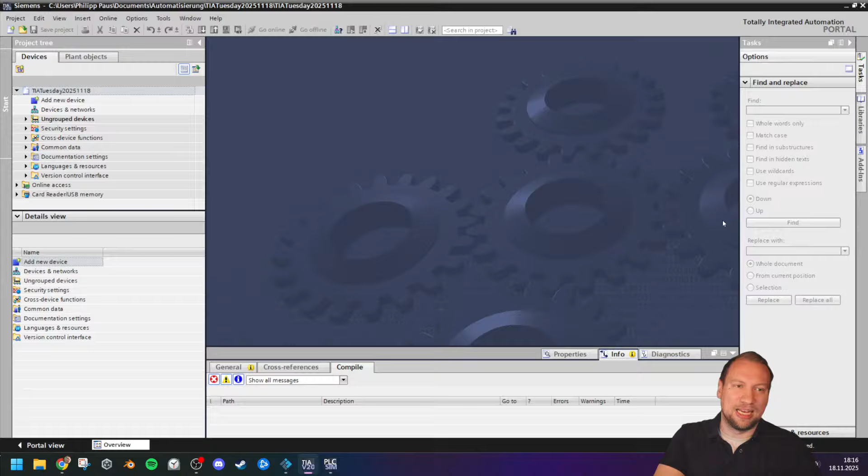An old IHK-Prüfung. Oh goodness, I have not done IHK-Prüfungen in a long time. Of course, I've been involved with quite a bit, but I'll put that here. IHK-Prüfung. Oh, that would be interesting. There's probably a lot of public questions. IHK, for everyone that doesn't know it, is the Industrie- und Handelskammer, which is the German agency that observes all of the rules in industry and so on here in Germany. And there are probably a lot of public questions that we could go into. Explain MRP. MRP is also interesting. I'll put that on. But then I can only put things on a list.

I will now do the... Oh, did I close my document? Damn it. Where did my folder go? There. Let's start with the PID though. We don't have infinite time, unfortunately. But I will also put MRP domain on the communication list there. Communication seems to be a very interesting topic for a lot of people, I've realized. Okay, let's go. I'll put this on the second screen here. So what I have prepared is absolutely nothing. Okay, yeah, I share my knowledge. Of course, if I can share it, why not? So here is the plan.

We do have this tank system here. Now this tank system can be controlled with a fill valve. So I can turn on and off the fill valve here, and there is water or whatever liquid leaking into the system through a valve system. And the nice thing about the software is it even has a fluid simulation going on. And a very common task in industry, and all around us, not just industry, everyday life, you driving a car, for example, is to keep something constant or to go to a set point value.

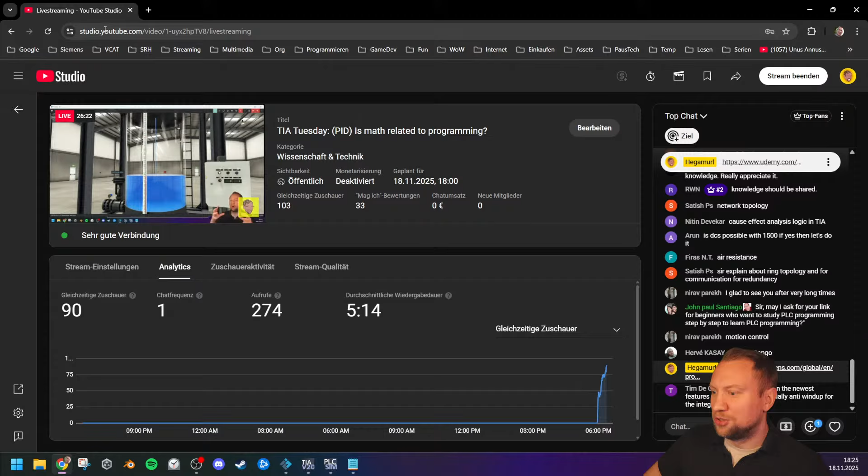So there we go. From Congo. That's at least same time zone-ish. Newest features, I will get into the PID features, I hope, in a minute there, Tim. Sorry, you shouldn't see my analytics going on there.

Okay, so yeah, there is a lot of complexity in this, and I hope I can hurry up now a little bit because I am now very slow. So what I want to do is develop a controller here step by step, where I can also have the set point here. I have a knob. This is my set point.

This set point, if it is at 0, if I turn it all the way to the left, the tank should be empty. If I turn it to the right, the tank should be completely full. If I turn it to the center, the tank should be half full. Obviously, this is an obvious thing, I would say. All the rest I will not be using, but I will use the set point here, which is right now at 5.0, so the tank is 3 meters, so it should go up to 150.

And there's many things we have to consider here. So now we really start with our content here. What I did in preparation, but closed again, is this. I will be using TIA Portal, and of course I will simulate my PLC here. The set point is our input in this case, yes. Or one input. We have 2 inputs. I'll get to that in a moment.

I want to communicate here with Factory I/O, so if you have the same setup, you will have to have a PLCSIM Advanced license, and then we have to change to TCP/IP single adapter. There is another way in Factory I/O, but that's what I want to use right now. And then I want to add an S7-1500 PLC. This S7-1500 PLC has to have specific settings. The first setting, it has to have a specific name, which is Factory I/O. And the second thing is it needs an advanced license here.

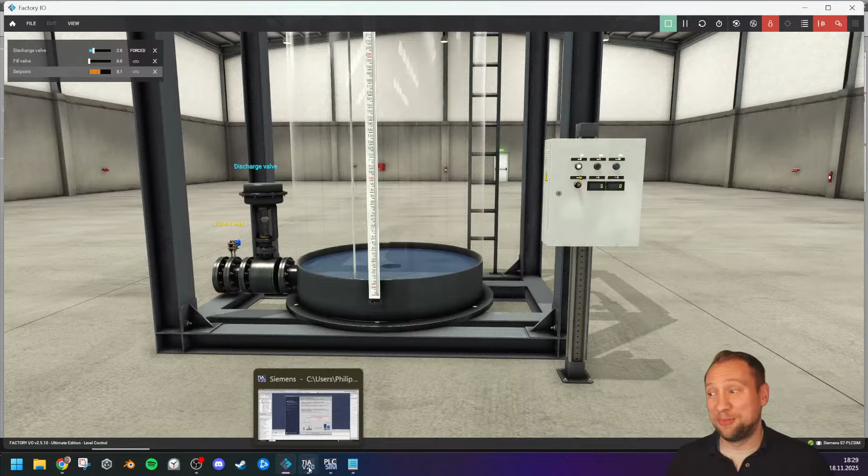If that wouldn't have worked, I would have had to restart my PC, and that would have been very annoying. So when we have a new PLC, I will deactivate all of the safety features here, right? I don't want to protect my project. It's not necessary. It's for me right now, so I will just deactivate this.

This here doesn't really matter what we do. It's for HMI systems mostly, so no password protection. Everything has full access. There we go. So no new settings, like with the firmware version 4.0, that pop-up that I just flashed through would have been a little bit more annoying.

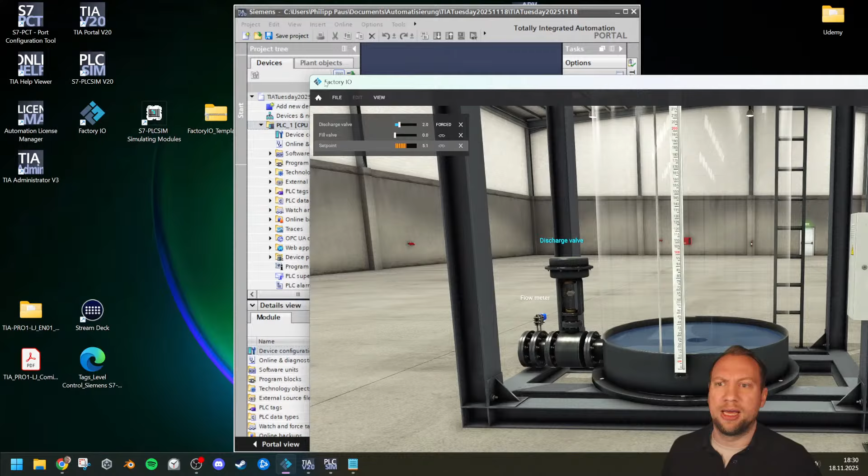Okay, so let's go. Now, the one other thing that I have already done is I have exported. There is an export button for my tags, so the I/O tags here I can export. I could also import it manually. Right now it's not too much, but since I have them, I have exported them. They are here on my desktop, and I can import this tag list into my tags here.

So I will go on my all tags, and there is an import button. I will press the import button. I will select the file, so you don't need to see my desktop here though. I mean, there's nothing on it, but still. There we go.

I get you, Satish. Ring communication for redundancy. I understand. You had that earlier, but I can't set up any ring network right now. I don't have a simulation for my networking here.

There we go. So that's it, right? This is the base setting here. That should be fine. There we go. Why was it so big? Oh God, yeah, I know why. This is gonna annoy me a little bit.

So now I want to connect, and I do not use the PLCSIM internal connection. I do use the virtual Ethernet adapter, which is able to communicate to Factory I/O. I also need to select all compatible devices because the PLC that we want to connect to does not have an IP address yet. This IP address 0.0.0.0, it's like if you buy a PLC. Trial license, 7 days left, I know. If you buy a PLC, it doesn't have an IP address.

Oh, right. Actually, very quickly, while I'm at it, when you download a program... I do have a document for this. When you buy a PLC, how can you communicate with it if it does not have an IP address? There are many different ways to communicate. If you want to download a program to a PLC, you want to use TCP/IP. That's a layer, like the communication layer. I don't have the layer names, but we will use a very high layer.

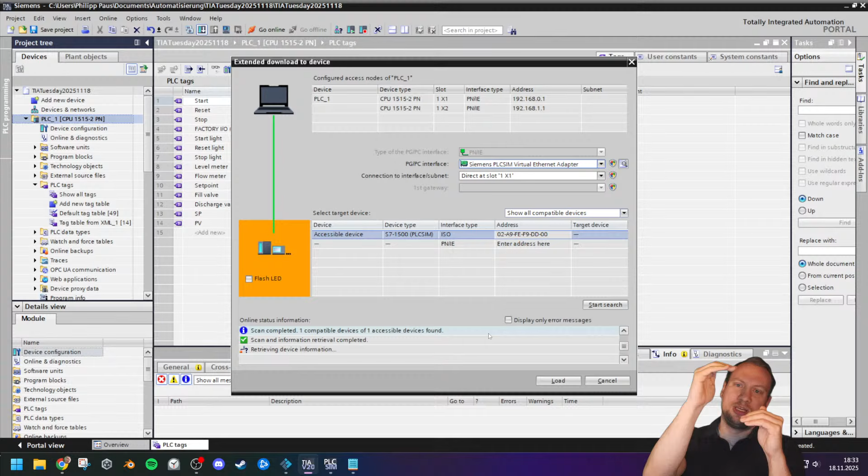Now the problem is we don't have an IP address. We cannot use this layer. So what happens first is we are using the ISO layer, or the ISO principle here, to first give an IP address to the PLC. So there's actually two steps when you download to the PLC. The first step is using the ISO layer to give it an IP address. And the second is download the program using that IP address.

So you can always find a PLC, because finding a PLC happens on the ISO layer, but you cannot always access a PLC because the higher level access happens through TCP, through the... How's the layer called in the ISO OSI model? Sorry, I have that incorrect. Through the transport layer there. TCP, yeah, transport, of course. Not too important though, but your PLC has two ways of communicating.

And right now, what happens if I click load is that the PLC is getting an IP address first. So this is the first thing that's going to change. Oh, I can explain software events along the way, sure. So the first thing that's going to happen is it will get an IP address. And you see this? That's the first thing that literally happened. And now my PC wants to communicate using that IP address. Now, my PC is not in this network. My PC is in a completely different network right now.

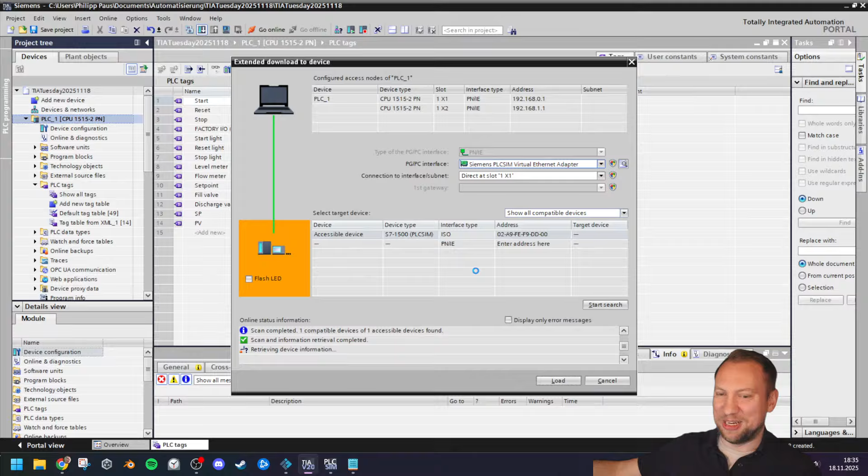Now I can manually do this, or I can just tell TIA Portal, yeah, please do so. Thanks to the ARP table. Now all of this is a completely different topic, but my PC now has an IP address, which is 192.168.0.241. And now both devices can communicate on the same level, so I can connect now. There we go. Network technology, not our topic here, but I think this is interesting. And everything should be fine.

I want to download, error. What I still have to do is, the PLC doesn't allow to be simulated yet, so I will have to allow TIA Portal to simulate. And that's what the compiler says down here. So right mouse button on my project, properties, protection, please allow simulation.

There we go. I could have prepared all of this, but now we learned, and that's what we're here for, right? Wait, I'm here because I'm having fun, but I'm also learning along the way.

So now I can click finish and I can start my PLC here. There we go. Now it's running. Now I can push this thing here. I can put it on another table, on another desktop or so. Doesn't matter anymore.

Hey, Kevin. I think the name rings a bell, but it's been some time. Congrats on your graduation there. Yeah, some years have passed since I've been there.

But congrats. So good. Now I do have my tag table. I can go online and I can look at all of my values here, right? And I will be able to interpret those. So the set point, for example, that is one of our inputs. We have two inputs, the set point being the first. That's the little knob here. Now I can turn the knob, and the knob I can see is from 0 to 10.

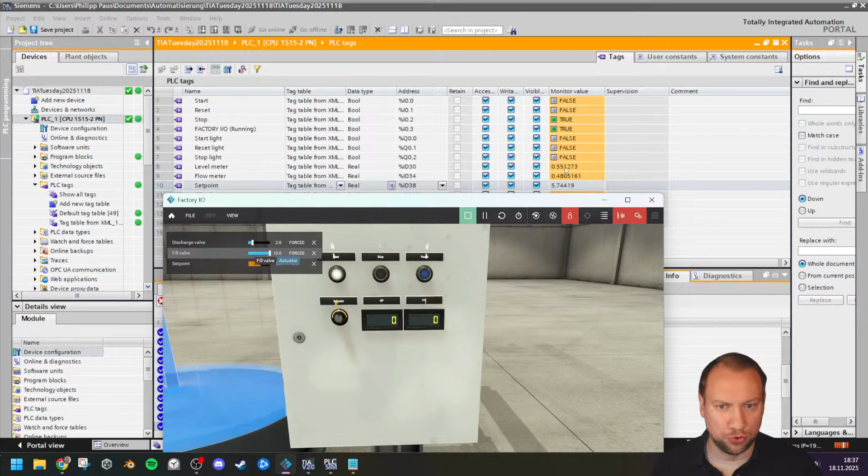And I do have my level meter, which will be our second input. I could also use a flow meter, but I will not. I will use the level meter only, where the level meter is giving me a value from 0 to, my assumption, 0 to 10 as well. I should know, I should have prepared this, but I think 0 to 10 as well, most likely. I can look this up here. Level meter is in real. It's most likely 0 to 10, or real should be 0 to 1, but that's fine. We will just scale that. So it's 0 to 10 here, in this case.

Which 0 to 10, understandable why they did it, they want to pretend it's a sensor that is sending 0 to 10 volts. Sure, fine, I get it, but I don't want this. Here's what I will change directly. I want to have the level meter not from 0 to 10, but I want to just use what we have here, 0 to 300. Why wouldn't it give me those values from the beginning?

So what we will do is a very, very quick, and I'm going to just pump everything right now into, no, I will make a new block. Function block, sure, why not? Tank, I will call this tank. And I will do ladder, could do anything else as well. And the first thing that I want to do is rescaling.

So right now we get a value from 0 to 10. I don't want this. This is kind of in percent. It kind of is correct, but why not, let's change things up a little bit. And I want to scale this a little bit. So I am going to use this very simple scaling process here. Can I?

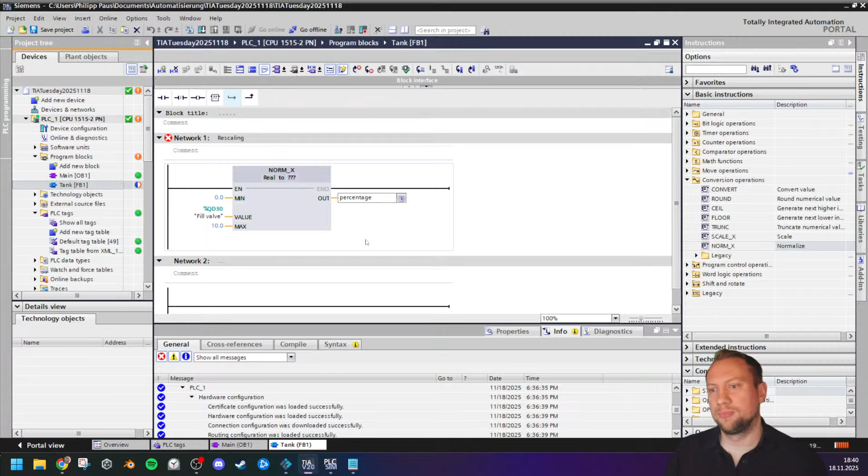And on the output side, what we will have is percentage. Percentage is much nicer, right? So I will call this percentage. And the percentage is in real from 0 to 1. That's much, much nicer. So I will make this a real variable. Now we will have a 0 to 1 value. And this value I want to still scale, and it should go from 0 to 300.

Right? So this percentage, now we have two things. We have the percentage, and the percentage can go from 0 to 300. And we want this in the level. I will call this level. And this should also be in int. I want this in real as well. Come on. There we go.

Yeah, I stopped doing videos like a couple of years back.

So that's the first thing, right? Scaling. Scaling is the first process here that is important. And so now we will have the percentage inside the tank and the fill level. And of course, I still have to call this function here in my system. I haven't called it yet. Which is like a beginner's mistake, but I'm rushing right now because I want to do much more. So I haven't done much yet. Good. Right now, tank is empty.

Right. NORM_X doesn't use, hey, Jobran, it doesn't use the Siemens 10 volts. You can make it go to 27,648. That is correct. But that would be... Very good point, what Jobran just mentioned. Wait, let me first verify that everything works before I just talk nonsense here.

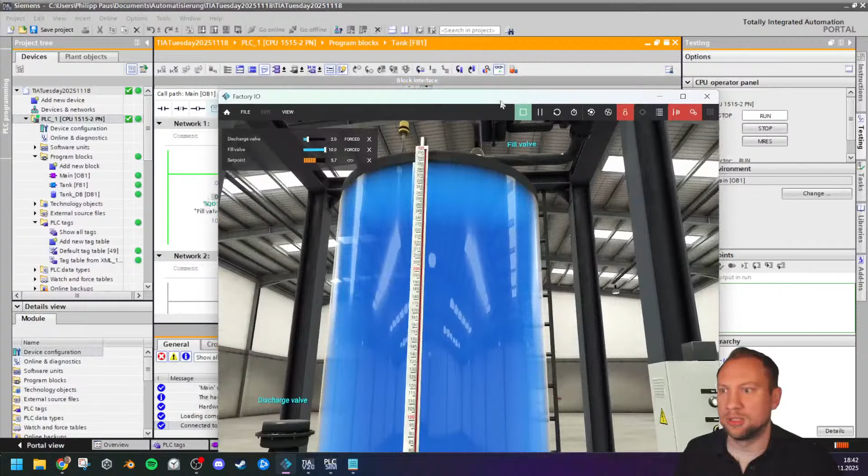Oh, that's the fill valve. I want the fill... the set point. I want the fill level. How's it called? Sorry, I did level meter. Sorry, that should be the level meter. Huh? How's this stupid level meter? Isn't that correct? Yeah. Oh, and this is a different value. Oh, God, I took the wrong input thingy.

Slow is smooth. Smooth is good. That's a good thing. You're right. I shouldn't be rushing. So I looked at the wrong thing. Did I? No, I still used the level meter here. So I looked at two different places. So the level meter here can go from 0 to 10. That's why those three things combine, right? 0 to 10.

I will explain, right? So right now, this is where mathematics gets involved, and I will open a mathematics thing now. Where is my frickin' folder, please? There it is. I created an Excel file today in preparation, and I called it Math for PID. So the first thing that we need to do here, and I will get exactly to what Jobran just said. So we do have our level meter. The level meter currently gives us a value from 0 to 10.

The minimum that it gives us is 0.0, and the maximum that it gives us is 10.0. I will have to use the comma as a decimal point because my Excel is set to German. So I have to use comma, so don't be wondering, please. And I will have this. Please give me a decimal point there. Yeah. So that's a decimal point. This is 10.0. So that's the first step here. Right? That's what we get.

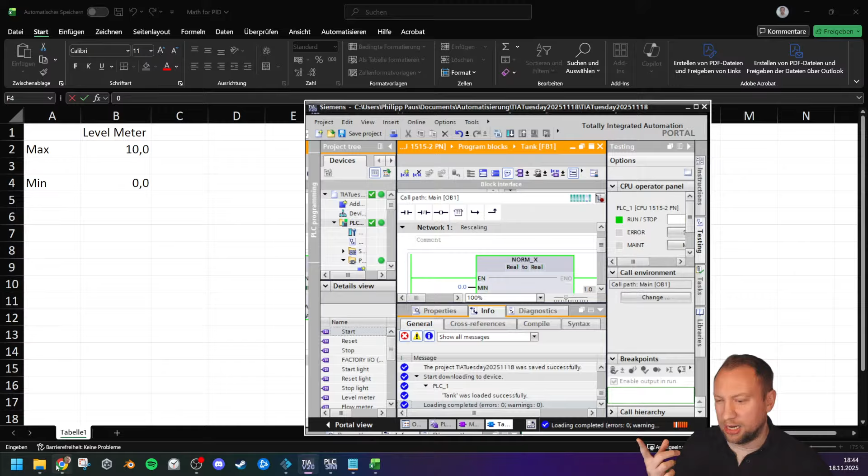Now, what I want in the end instead is my level in centimeters or whatever is written on this scale here, right? Where is the scale? There, right? This scale tells me 0 centimeters. Oh, it actually says centimeters there. Until 300. So that is my 0 to 300. That is what I want to have. That's not the ultimate goal, but that's what I want. So I want to be able to set, hey, go to 150, which is then there. Because that's the physical value that we're going to go to.

That is your kilometers per hour. In our case, this is the level in centimeters. This level here, right now, what physical unit does it have? It's 0 to 10. I don't know. It doesn't have any unit. Right. So the first step that we do, and now I make a full class out of this. Fantastic. I could make a couple of videos out of this, but welcome to a PID intro class, or analog intro class right now. So the first step that we do is something called normalizing.

And I will get to exactly what Jobran mentioned a second ago. Why is it? What is this 27,648? I'll get to that in a second. We don't use that right now, but I will explain what it usually is. Now, normalizing. We'll take the value 0 to 10 and put it into something that is much easier to understand, into the frame of 1 to 0. And that goes there. Now, this 1 to 0, this is in percentage, right? It is not 100%, but it is 0 to 1, meaning 0.5 will always be 50%.

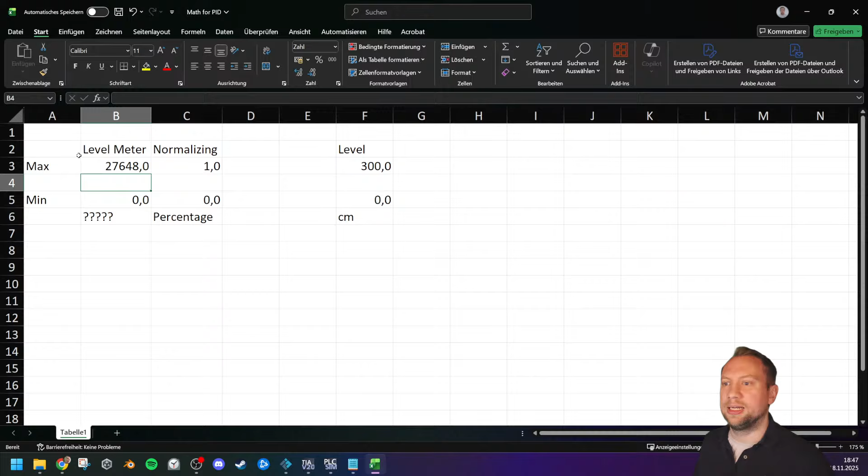Now what Jobran said, NORM_X uses something called 27,648, and this would not be in real. This is usually an integer. Now this number is very specific. Some people call it the Siemens 10 volts. Now this Siemens 10 volts, this 27,648 is the same as 100% on an analog input module. Right? If you have a sensor and if you have set your analog input module to go to 10 volts, if you have reached 10 volts, you will get an analog value of 27,648. This is your 100%.

Now, if you are familiar with digital technology, then you will understand that this is kind of wrong. Usually, if you have a 16-bit thing, right, you will go up to 32,647? What is... Oh my god, I can't calculate. That's why I have tools. No, that should be in binary. Whoops. You probably know it better than me. But I will still use my calculator. There we go. We can go up to a value of 32,767. I mix up numbers.

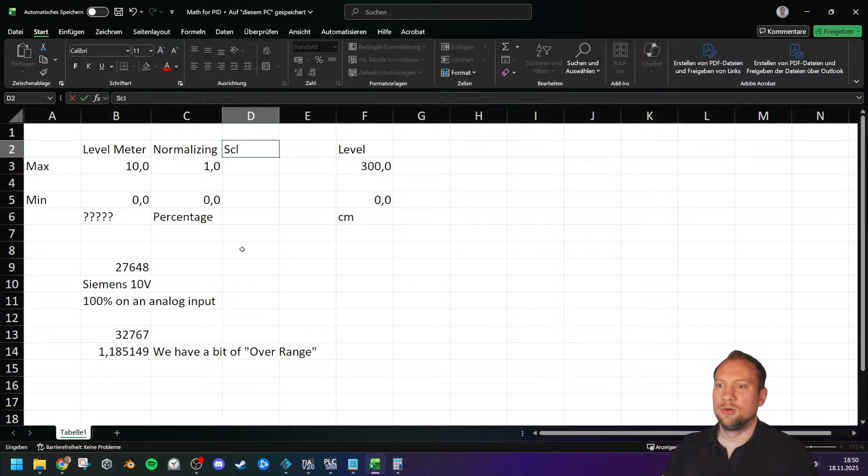There we go. So the first step is normalizing, and the second step is then scaling. With the scale block, what I have done here in TIA Portal is I took the percentage that always goes from 0 to 1. It's always 0 to 1 now. Whatever the input is, if the fill level maximum is all of a sudden 17.8, doesn't matter, because 17.8 is now our 1.0. Now if this is 1.0, so 100%, it will go here, and now it is 300.0. If it's 0, it's 0. Everything in between is linearized.

You always use the 27,648 for Siemens, yeah. Instead of 10, depending on what is connected. If I would have a literal Siemens analog input module, I would have to go from 0 to 27,648. This is what you usually do if you have an analog input module. Doesn't matter if it's voltage, doesn't matter if it is current. This is what the analog input module gives you normally.

But we use a simulation. In the simulation, we get 0 to 10. That's why I'm scaling it, so we have a normal value now, right? Which makes more sense. This is a value that I can work with. Sure. Good. And now you see, I do get the level there as level.

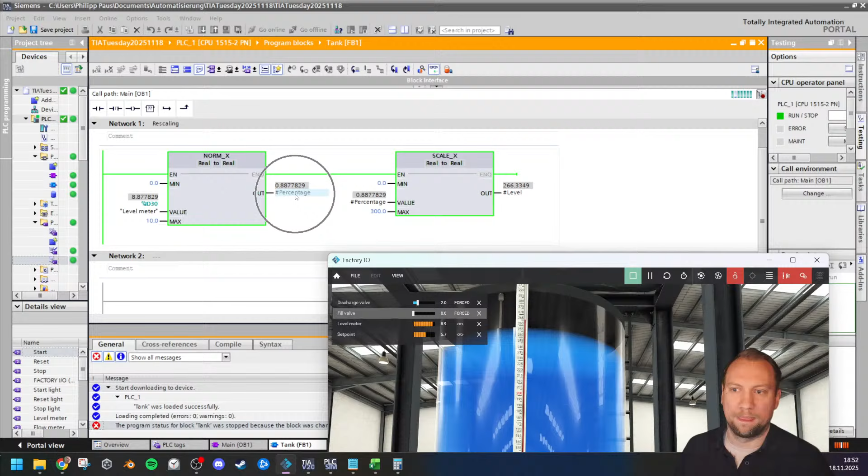Now, this will already help us. Look, the fill level now drops, right? And I can now see how high the fill level in the tank is right now. I also have a second advantage, I can also use the percentage. And let's get to the first level of controller here. Right? Now, the first level of controller.

Isaac, in this case, the fill level I had to adjust to the simulation. The fill level here is just a real value that goes from 0 to 10. That's why it is this thing here. I will get to a technology module soon, though.

I'm glad, Osiris. I'm glad that you learned it now. Yeah. It is kind of stupid. It's not stupid, but you have to know about it. If you don't, it is what it is. Yes, Lisa, that is correct.

We would use basic math. Like you have a curve and it's all linearized. But there we go, that's what I have those blocks for. In other languages, I have written this math plenty of times. Why do we use this? Now, one additional comment here, actually.

There is, inside of legacy, actually a block called SCALE. This scale block, if I put this into my program here, does whatever those two blocks do as well, but it always uses a range from 0 to 27,648. If I go to the help function here with F1, it will tell me this is a static value in there. So this only works with Siemens input modules, not with any other analog values. So you will see it always uses the 27,648. And there is our formula that we can use.

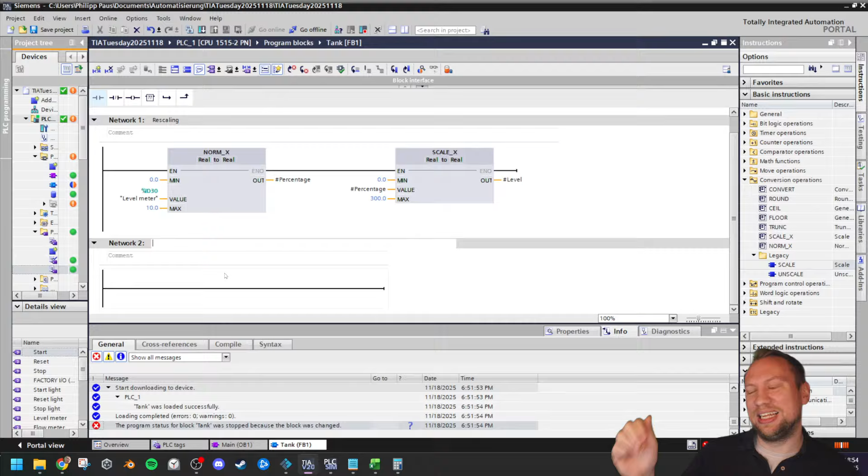Okay, let's have the first controller first. Oh god, only 1 hour. Let's see if I can take the challenge here. There's 3 different levels of controller that I want to do now, or maybe 2. The first level of controller is called an on-off controller. An on-off controller is the most simple controller.

This would be if you're driving in a car with me, right? The on-off controller is extremely simple, the most simple kind. We do something very simple. If we are below our set point, we go 100% with our output. So the pump just goes on, right? If we are above the level, we just go off. So this is a simple on-off thing.

This is linear extrapolation. Yes, Brett, this is linear, that's what's happening in there. Let's not concentrate on the math too much. Those blocks are doing the math for us. I have written the block plenty of times. So the scaling, that's the scale in the end. So this is what we want to do here, and that's what happens now.

Now what we want to do, the first level of controller, is going to be an on-off controller. The on-off controller is very simple. If below set point, output on.

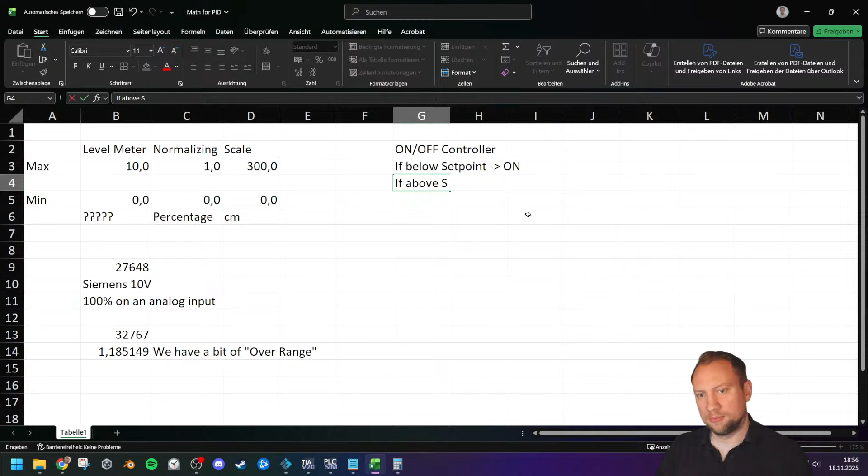If above set point, output off. And there is one thing: if we're exactly at the set point, we can decide if it's on or off. Usually you say, if you are below or equal. And if below or equal to the set point, we turn the whole thing on. And that's the simplest controller. And let's do this already. Right? Therefore,

what was our set point thing here? It goes from 0 to 10. Oh, it would have actually made sense for the set point here also. Because the set point goes from 0 to 10, I didn't need to scale the whole thing here. I could have actually just used the level meter because it's also on 0 to 10. What I need to do now is to do the same thing with my set point as well, which is a good thing. That makes a lot of sense to do actually. Right.

But I will now create 2 new variables, percentage level and percentage. Whoops, misspelled that one. 1 second, create this variable, it's real, there we go, percentage level, and I want percentage set point. There we go, got this, got that, and then we have the level here, and we do have the set point. I need to create another one. Oh, no, set point scaled. So you didn't see anything, that's perfectly fine.

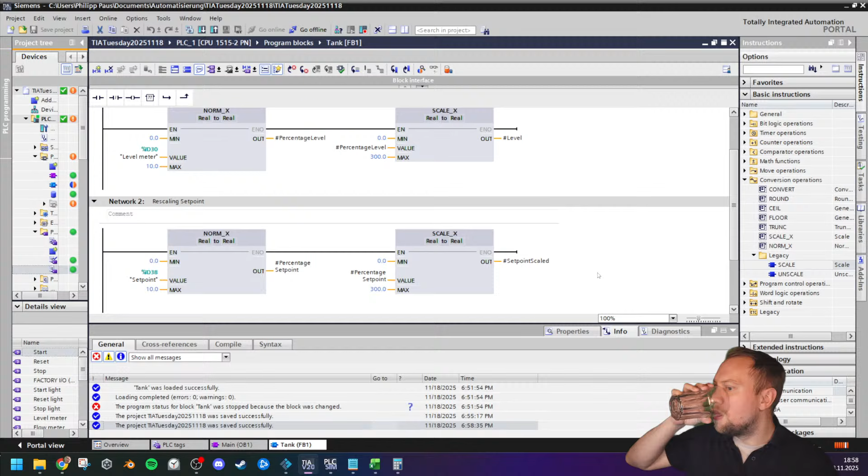For the normalizing block, very good question, Margot, right? Or Mago. Very good question. That is why you can change the minimum here. A lot of sensors, for example, go from 4 to 20 milliamps. So you could say 4 to 20. This would now be 0%. This is now 100%. That is exactly why we can change the input here. But very, very good question. That's why we can adapt it.

Yes, 10 is supposed to be the voltage. The problem with the 10 as the voltage is that your analog input, we don't have an analog input that makes it into a number. The 10 as voltage, and that is correct, Oliver, is for different tools. Because 10 volts in Siemens is 27,648. In other tools, it's the 32,000. We could use this, but the physical input module usually changes it into a number,

which I have kind of done now. So what the physical input module actually does is it takes this value and it scales it. That's literally what the input module does. It takes the 0 to 10 volts and makes it into a number between 0 and 27,648. That's what an analog input module does, or one of the jobs. Good. This is basics of automation, yes. The scaling process you have in most projects, 100%. But I'm overcomplicating it right now, right?

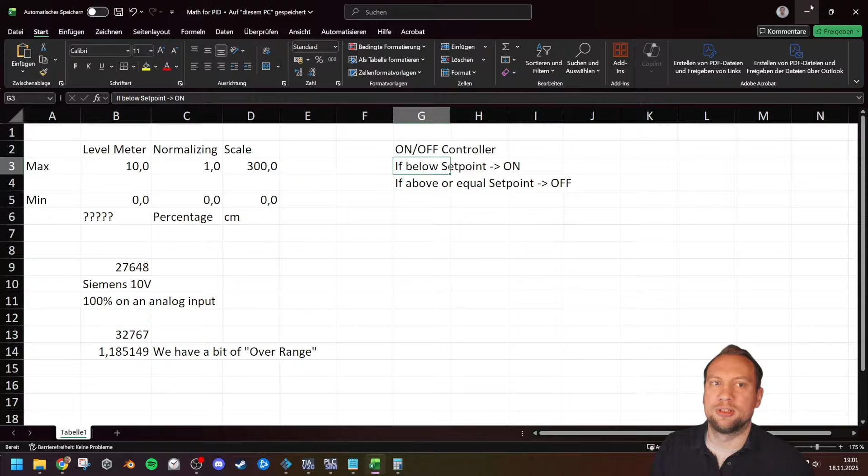This is scaled. So now what I want to do is if my set point here, which is the set point scaled, and let's also call this level scaled actually. If my set point scaled is higher than the level currently, completely blast the thing. So this is what an on-off controller does. It's the most simple thing we could do. We have a comparator and we say if, what did I write? If below or equal to the set point. Actually, this equal should be here if we are correct. So if we are below the set point, turn the thing on. Most simple controller, called an on-off controller.

If we are below, so comparator smaller than, if the current level is below my set point, then I want to have the output, the valve here, 100% on. And the valve itself is called the fill valve. And the fill valve can go from 0 to 10, which is an analog output. This is not great right now, but I will just use this 0 to 10. So what I will do is a simple move command now. I'm going to move a 10 into that output. Usually you would have an analog output and turn it on 100%. I will just move a 10.0 into the fill valve, I think it was called.

Yeah. Now, what I still have to do: if it is smaller than, we want to turn it on. If not, we want to turn it off. So I also have to do the other statement here. I have to push a 0 if we are not below, so there needs to be a not in here, or a negation. There we go.

Hey Malu, they have helped you grow into automation. That's so cool that I can reach the rural areas in India. That's so cool.

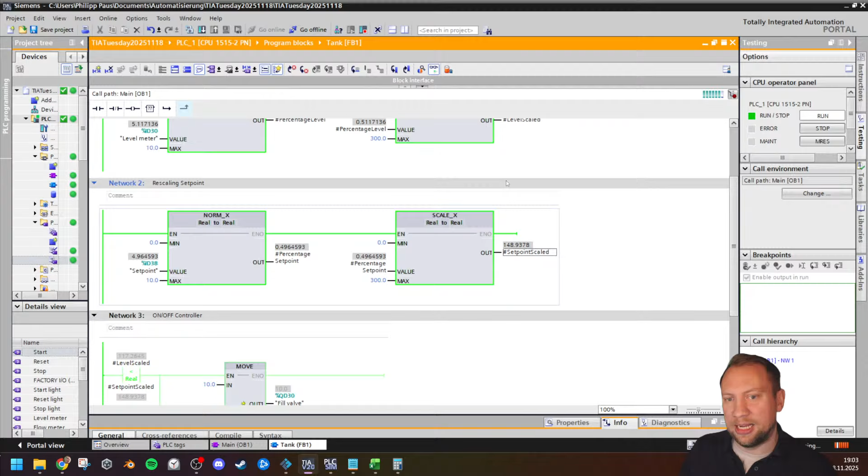And now look at this magic program going on there. So our set point is currently set to, let's set it to half the tank-ish. So set point is right now at 5. So you see the set point we want to reach right now, 148 centimeters or 149. And you will see we are now above that level. And we will now keep that level as well. Right? See this? We will kind of be stable at 150. Kind of. Not 100%.

You watched every video? Oh my god, isn't that like 300 videos or so? Good job, good job. Or 100, I don't know how many videos there are. But I'm happy I could help.

But now we have this. This is the most simple kind of a controller. Good job. Good job, us. It only took an hour. Now programming this in a professional field, of course, this is like a 5-minute job usually. You don't even need a controller for this. This is just 2 sensors, right? If one sensor is higher than the other, turn it on. This is just the most simple thing, right?

But right, I'll leave this on right now, and maybe you can see a problem with this. Does anyone see any problems with this?

How long have I worked in automation? I work more in education itself, but in the field itself, I have worked for 16 years now. And I apparently can't drink. Is that visible on camera? Yeah. So I'll just do this.

Does anyone see a problem here? Like imagine this is you driving a car. You want to keep a steady 150 kilometers per hour, right? But this is what happens. Any problems?

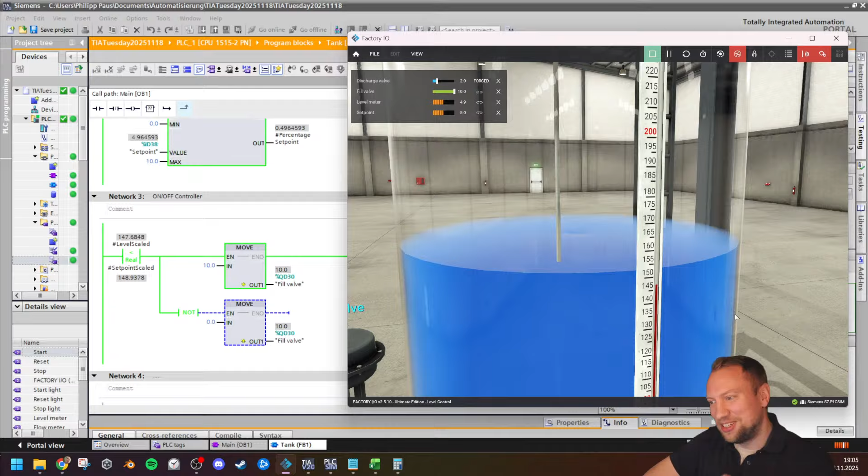Yeah. So we have many problems here. Right? When we reach the set point, the input flow needs to be the same as the... Yes, Jasmine, that's exactly where we want to go. But that's what we have. We also overshoot quite a bit. But this depends on the system. It could be a very good controller.

The 2 biggest problems that we have now is the valve operation here is just on-off. In your car, that means you step on the gas full or not at all. Right? Full, not at all. In the worst case, and this is even a good case right now, this will lead to your system doing this very fast. This right now is slow. The valve can take it. This valve can take this for months at least, right? But it will lead to many, many hardware cycles.

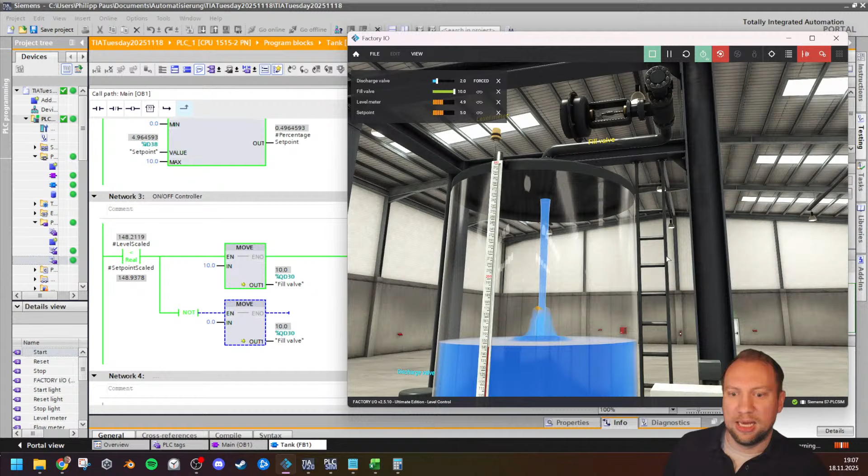Yes, 100%. And if my system would react faster, right, which I think I can actually increase the speed here, it will create much more rippling. And I can't do that, unfortunately. It will create much more rippling and wear on the actuator. This controller, for many, many reasons, could even be from Romania. Hey, Vlad. This controller is also called a bang controller. A bang-bang controller, because it turns on and off very aggressively.

It's for 5 years. I've been not doing it for 4 years. So I've been basically a YouTuber for a year, you can say.

And now what I will do is I will go offline and I'm going to add a new block. I will make this a function. Let's make it a function block, doesn't matter. And I will say this is an on-off controller.

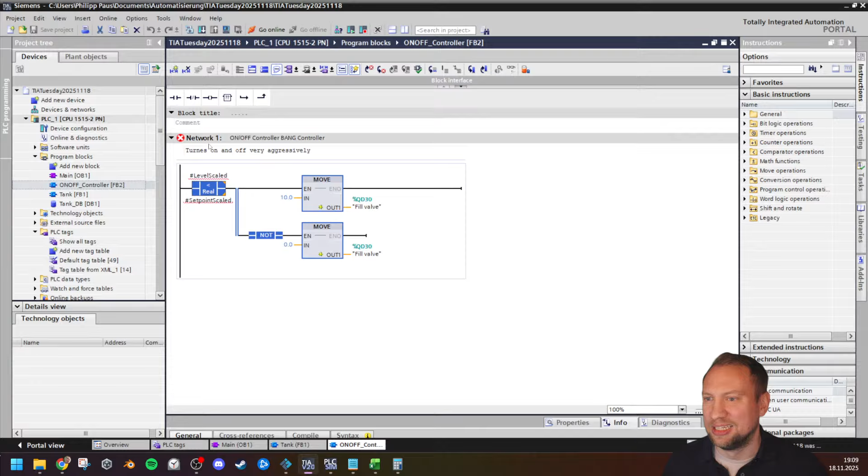I will not put it in another network. Doesn't matter. This is not too much effort for me to do. I would usually make this in a function block itself, but we would have to have many in and out parameters. I don't want to do that. Right? So what I will do instead is library. Oh, I can just deactivate the whole. No, I can't. Shit.

What I would have to do is, hey, logical controls, hi. Let's do something that is not really good. Don't ever do what I'm doing now. But I will just do a simple jump instruction. That's not what we should be doing, but I will just do that. So afterwards, we will jump, and we will not use network 3. So jump instructions are actually quite convenient. So you can skip things. On off. Doesn't matter.

Hey, Gordon. Hi, how are you doing?

So we have the on-off controller, so we can jump here. With a jump command, you can jump to another part in the program. So right now I can choose where I want to jump. Right now we use the on-off controller, so I want to jump to the on-off. Now what I can also do is make the next type of controller, which is a so-called 3-point controller. That's what a lot of you have already mentioned.

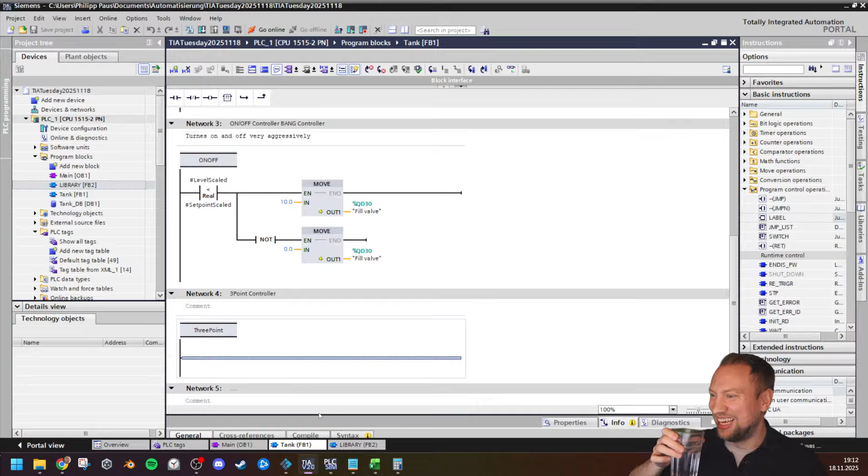You can do the auto-tuning. You can also do manual tuning. There's a lot of math involved, but my favorite is the CHR tuning method. CHR, of course, is a car as well. Are you kidding me? The Chien-Hrones-Reswick tuning. You can do it manually. It's just a little bit of math. It's not even complicated.

So 3-point controller. Now what we need to do in a 3-point controller is I will need a new variable, and I'm going to create a new constant variable here. This constant variable is going to be my so-called tolerance. Right now I try to keep the level exactly at 150. Now with the tolerance, we will move this a little bit and we will have 3 points. We have the set point where we want to go. We have a lower limit and an upper limit.

So we slow down. There's also Ziegler-Nichols. The ZN method is another method for tuning. They will have very similar results. Auto-tuning does those methods, actually. I don't know which one, but one of the standard methods. Now, the tolerance here is in float.

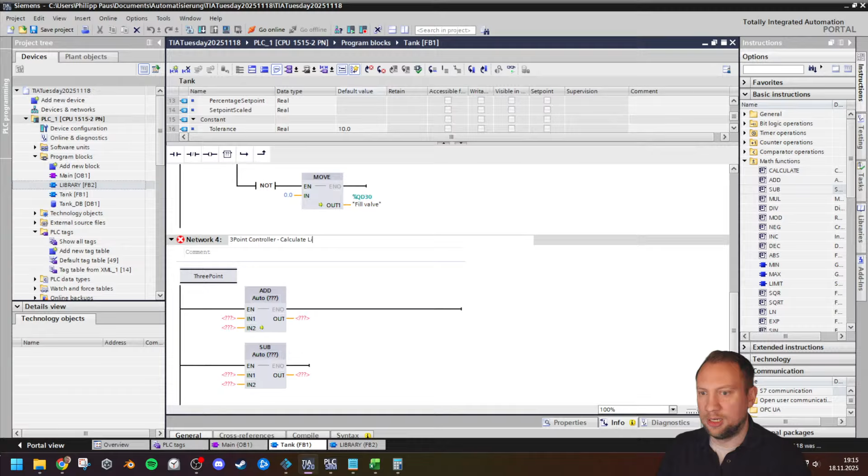Right? So we will need to calculate first, though. We will need to calculate those limits, so it's a bit more complex. And I can definitely not finish anything that I planned for today, but that's okay. Add and subtract. 3-point controller, calculate the limits. Now those limits, turning on if we are very low, turning off if we are very high, those are also called hysteresis, right? Because we're going to move between those 2 points now. That is what the hysteresis is.

Now, the upper limit, and we will have the lower limit. Right? It's always the set point, and the set point scaled. Yeah, set point scaled. Plus our tolerance. Right? And the other one is set point scaled minus our tolerance. Now this gives us many, many advantages. Right?

Like, for example, our controller, our system doesn't turn on and off as aggressive anymore. Right now we don't see the aggressive too much, because it's still a fitting controller right now. And it's already moving between those. But if you have a very fast system, it will be very, very aggressive. Right? But right now we will have an upper and lower limit.

How many programming languages do I know? I don't know. Depends on the systems. 10 might be low. It doesn't really matter.

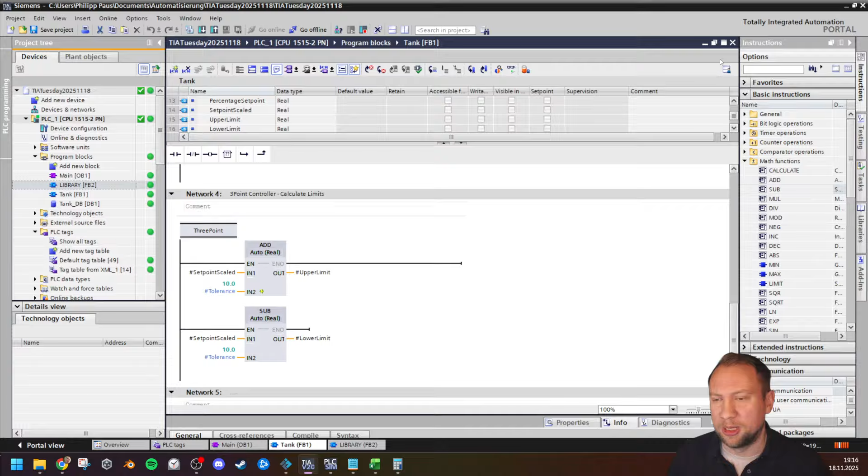Oh, by the way, if you ever get this message, the specific call environment is invalid due to programming. Oh yeah, I closed the block and you can reopen the block. And this library doesn't. I don't use that anymore. 1 second. You just close and reopen the block.

10 might be low. I'm just making up numbers now. Right? But we have our lower limit, our upper limit. Right? And you see they are now 158 and 138. And now what we want to do, of course, is turn on and off. That's still the thing that we do. Still turning the thing on and off at 100%. So we need this still.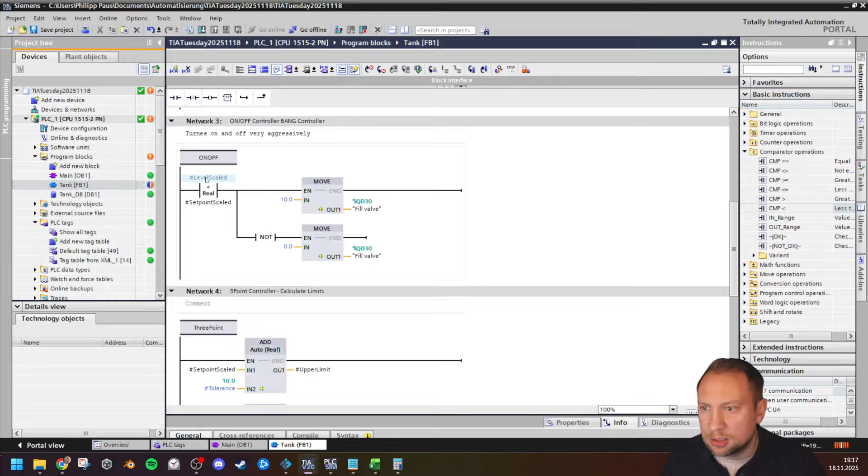So I'm going to take this. But right now, not directly looking at the level, but looking at the lower limit and upper limit. We want to turn on if we are below the lower limit. And that's what goes here. If we are below the lower limit, and what was the thing? Set point? No, the level scaled. Right. And we want to turn on. That's when we want to turn on.

And if we are above or equal, right, the higher limit, we want to turn off again. There we go. I hope I didn't make a mistake. Maybe I did. Probably even.

Can I get a short summary? I mean, you will see the summary in a second. A project about project structure. I have that on my list already. Thanks for being an important resource for the Danish engineering program.

You're very welcome. And now you will see we turn off. Okay, right now we're turning off. So we're letting liquid out of the tank because we are above our upper limit. Right? And we will have PID as the next controller. So I still can go in there. And right now, this is going to take ages, but that's okay. But we will move between our lower and upper limit now. And this is hysteresis. If we come from the top, we go to the lower limit and then we go back up. And then we move between this.

Oh, now I want to show one more thing. I will get into the PID parts. Oh god, it's 40 minutes. I want to show you one more cool thing. Okay. Shit. Oh, 2 hours is not enough. One more cool thing. Right now, I'm talking, right? I'm showing and I'm demonstrating with my fingers and with my hands. Why am I so stupid?

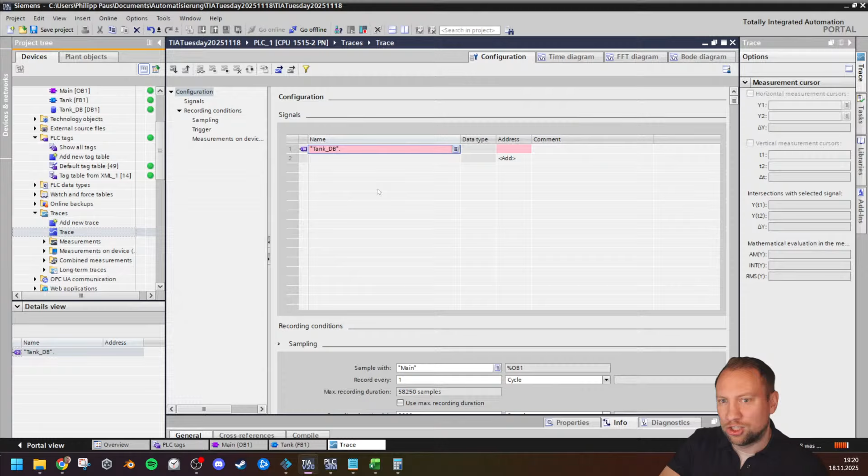I can just take a so-called trace. A trace is exactly what we need right now. I want to add a trace. Now, a trace, and this is probably not new for everyone, but this is something really cool. In a trace, what I can do is hopefully I can take... I can't take it, but why? Oh, it's got to be static now. I will have to make a smaller change, which makes a lot of sense. All of this needs to be static now. Doesn't matter, changes nothing.

It changes stuff a little bit, but it doesn't really matter. Needs to be static though, so I can actually get that. Now what I want to do is I want to display all of this in a graph. Traces are graphs that do exactly what I just told you, right? I just added a new trace.

Now in this trace, what I want to see is the lower limit. I want to see the upper limit, which is my tank data block here, upper limit. And I also want to see, what other variables did we have? Percentage level, no, set point scaled. Yeah, the set point scaled. And I also want to see the current fill level, right? Set point scaled and level scaled. There we go.

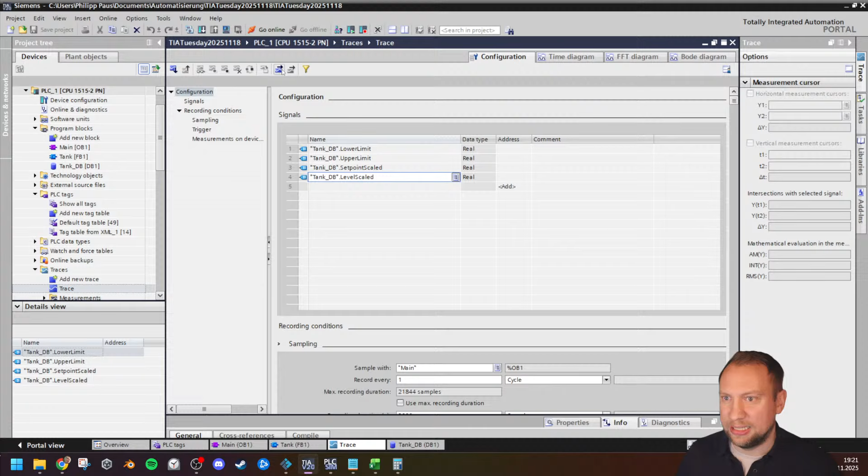This is a 2-position controller with hysteresis. There we go. Now I do have those, right? Those are the values that I want to record and display. And what I can do now is click this button. And I can click on live. And now I can see it live.

Now, can I overlay them somehow? Does anyone know if I can overlay them? Damn it. One second. Interpolated view. Save the current display options and add. What? No, not interpolate. I mean interpolated display samples. No, what? Why is it just fat? Can I just see all of those overlaid, please?

Formula, color, scaling group. No. Automatically. Just 1 second. Minimum scale. 0, 2, 500. 300. One second. Scaling group, probably. I need to test out this a little bit as well. Set group to 1. Yeah. That's what I thought. Thank you.

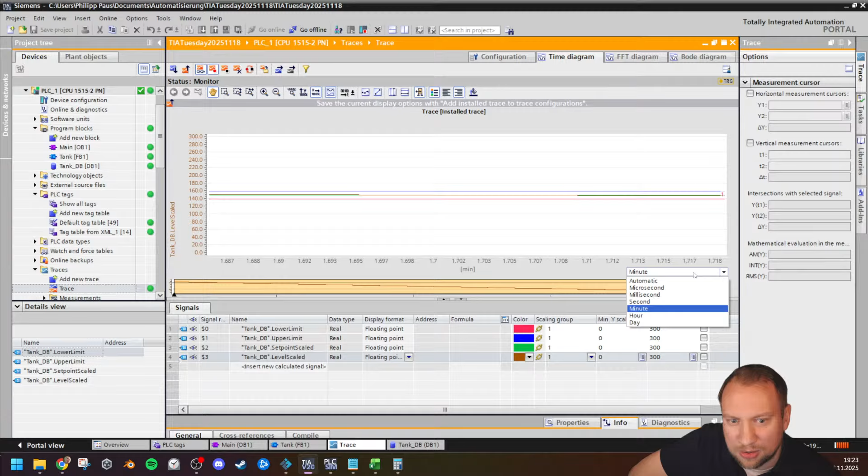And now I don't want this anymore. So now, let's take this in minutes. Right now we are monitoring, and we see this in minutes, and right now it is kind of stable. The level is what we currently have in the tank. Why is this? Oh, wait, I need to zoom out. This is not pretty.

It doesn't matter. Now, let's set the fill level to 0 right now, which I can do with the reset button here. Now the fill level is 0, but also my set point is 0. So I will now change the set point, and we can then see how the controller behaves. How do I make this a minute or so? It should be fine, hopefully.

So I'm now setting this to like 50%. And you see the brown one here, right? The brown one is our fill level. Scale between, it doesn't really matter. Let me zoom out. And you see the brown one, the fill level goes higher and higher. How do I zoom? Sorry. No. 0 to 500. Thank you.

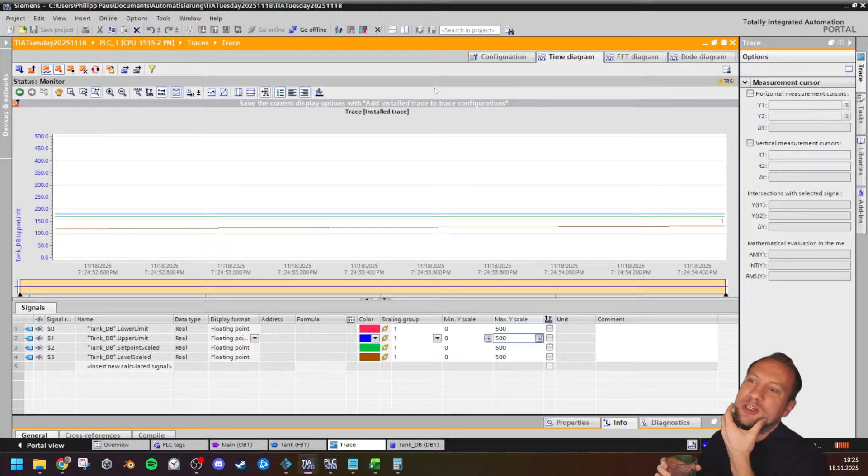Now if I reset it again, and I'll put the set point there, right? Goes to 0, you see everything is rising. I can of course zoom out. Oh, if I stop, it shows the whole history, you're right. That's a good point, Silent Sniper, thank you very much. It's rising, but no, it doesn't show the history, because I'm not saving it anywhere. It just has this much of a display. I think I can't even zoom out.

But now the controller, the brown one, and that's what we want to see. The brown one wants to stay at the green one. That was our on-off controller. But the brown one will now stay between the red and the blue one. Not exactly, because the system is a little bit slow, but it will turn on when we are below the red one, and it will turn off when we are above the blue one. So we will have this behavior now.

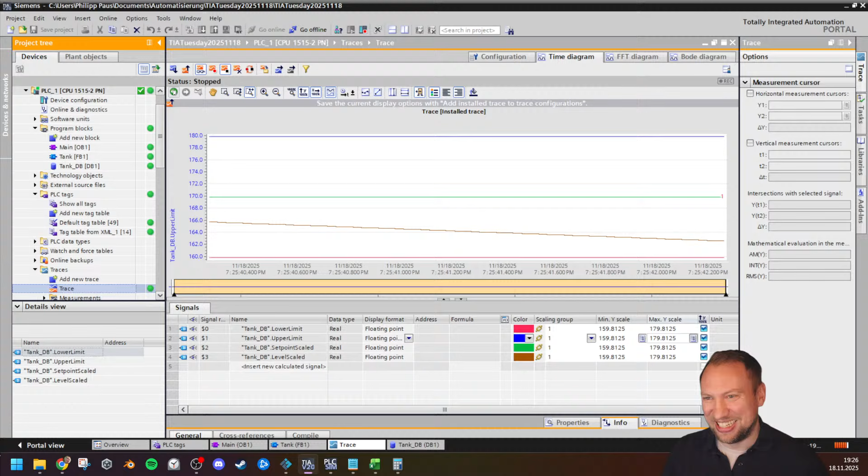Now, if I want to have this pretty, so the stream itself will be recorded, the values not. The stream you can always watch later on as well. Now, let's make this pretty.

1 cycle, let's make 10,000 samples, which is approximately 10 seconds right now. I want to trigger on a tag. The tag is if my set point scaled is inside a range, and I will set this range from 100.0 to 200.0.

I don't want to use max, because that could be very long. Oh no, it's 21 seconds, but I want to use 10,000. To do it correctly, now I'm rushing. I can make an organization block. This organization block is a cyclic interrupt. The cyclic interrupt, I will give this 1 millisecond, right?

And I can use this 1 millisecond block now. Right? I can use this 1 millisecond now, and now I can set this in seconds. So I want to record exactly, and that's what I had beforehand, 10 seconds. There we go. The value must be greater, other way around, of course. There we go. I want to have the pre-trigger of 1 second. Why did I set this to 300? I want 100. There we go.

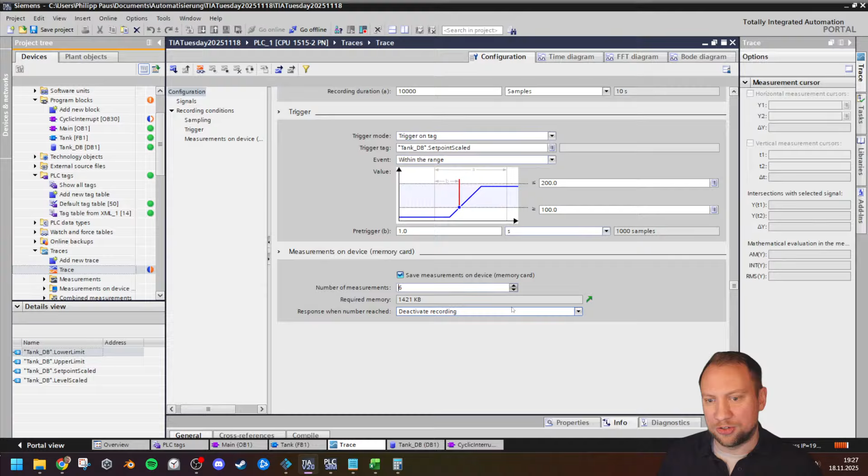So now if I put the set point between those values, the device will take recordings, and we can watch those later on. Here we go. That's it. Okay, if I did any mistake, this was just me fooling around.

No, I need to upgrade my... My PC is very fast, Luca, yes.

So now I'm downloading the trace, and I am also recording the trace now. And right now it is recording, so we can look at the values later on. But what I can do now is I can close this trace, right? I can go offline, I can close the trace. And now I can play around with my system here a little bit.

So now I will set the set point to like 150-ish. And I will see how my system reacts. And now I think 10 seconds or whatever I set the thing to is too few. It takes longer than 10 seconds, so the recording will be messed up. Doesn't matter, we will have separate recordings. So let's make another point here.

God, why? The perks of being a gamer, yeah, I do have a fast PC. The perks of, like, no, I also invested in this because of TIA and automation stuff.

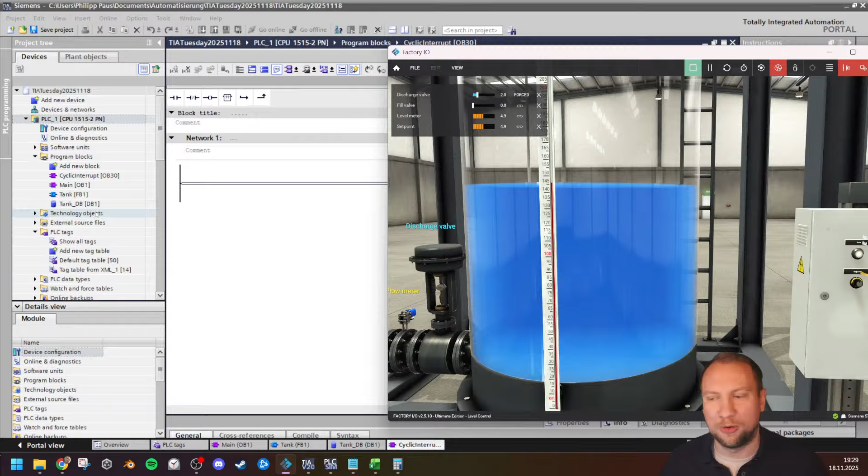And now this will be between those two values. It will pop back and forth between those two values. And now what I can do, because I set the trace, and I should have set the trace to like 30 seconds or 2 minutes, doesn't matter though. I can look at the trace, at what has happened inside of the device, you see?

And now we should be able to see at some point, and because I'm just taking like 10 second recordings, you see that the thing is falling and jumping back up, right? Depending on if it is above or below. You can see it perfectly.

Installing TIA on SSD, definitely, yeah.

Now this is not perfect. Last thing, and then I will. Okay, I will change the settings here a little bit. Record every, let's make this, I don't know, every 10 milliseconds. And I want to record for how long will this probably take. Let's make it 1 minute. Is a minute enough? Let's make it 90 seconds. 90 seconds should hopefully be enough.

God damn it. Version 20 is also going quite fast. Yeah, TIA version 20 is quite fast as well. But you still need to have pretty decent hardware.

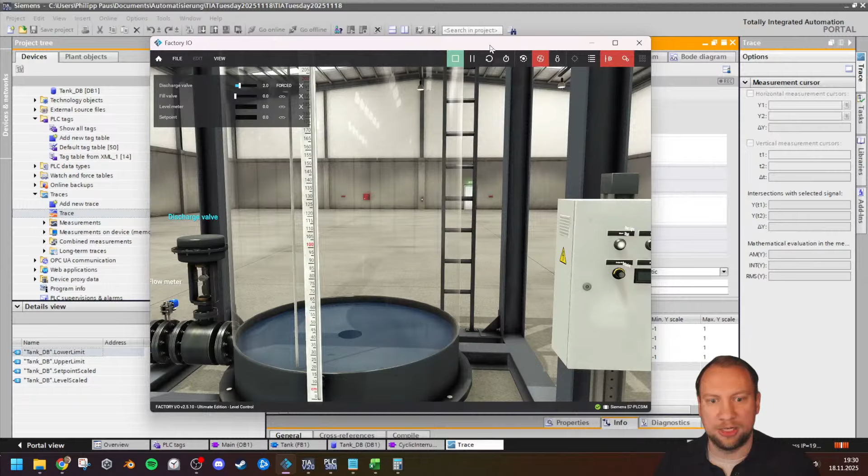So right now, let's go back here. Let's reset the simulation. So I reset the simulation. The set point is now 0. And now I want to start recording, which is waiting for the trigger. The trigger is me turning on the set point here. And then we can hopefully see the magic happening.

And I hope that 90 seconds is enough. If not, then I don't care. There was one more setting that I need to, it doesn't matter. Right now, I turn it on. And now it is recording. And now we will also have the display for 90 seconds. And I can put them all in one scaling group again.

Oops, not 11. And now we see it. 200 is the next one. Right. So if we go above the blue one, it will turn off. And let's maybe zoom in a little bit. Right. And if we go below the red one, we will turn back on.

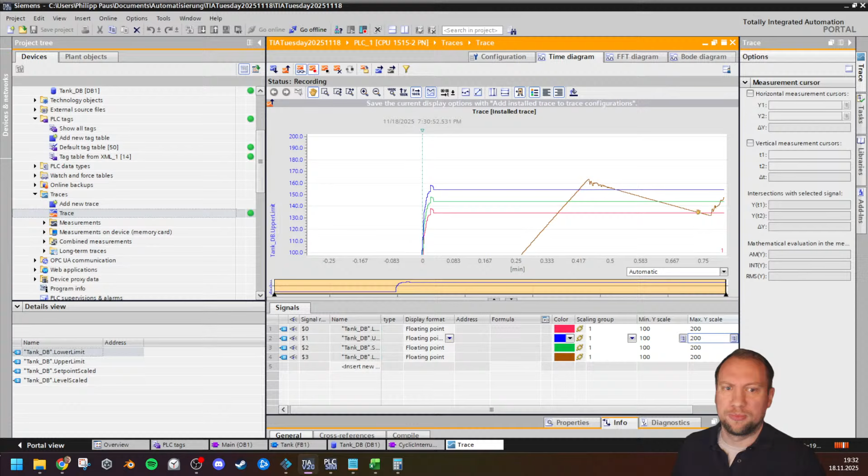That is what the 3-point or 2-point controller, I think it's called 3-point actually, but that is what our controller right now is. Right. That's what we're doing. Now this is what we have created. Even with a trace. Hey, we have added the trace.

Yeah, every 15 minutes becomes a 3-hour project. I mean, it's been, yeah. You're right.

There we go. Now this is pretty decent. This is pretty good. Yeah, they have some nice features in PLC Sim version 20, but it gives me a lot of errors as well. But that can always happen, right? This is good. This is already a good controller. This is decent, I would say.

Not perfect, but decent.

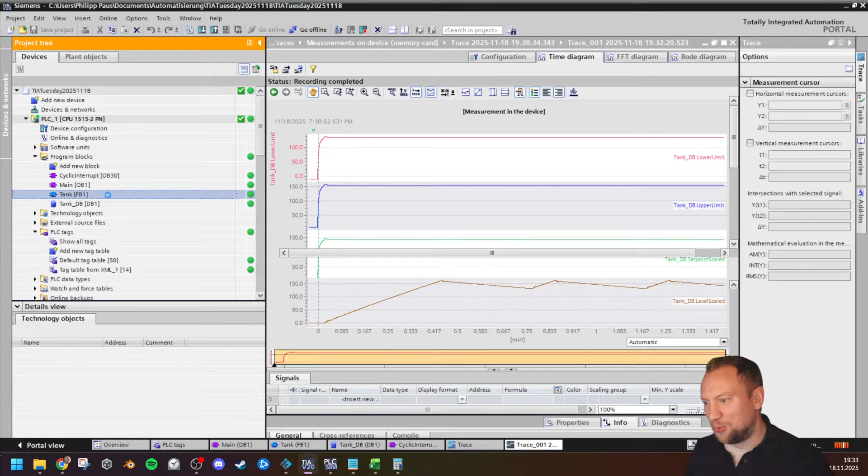Now there is one way better method, and I wanted to develop this whole thing. And that's why the title of the video is, I think, math related to programming. We have done a little bit of math now. Not too much though. The real math would start now. And now is the fun time. So far I've not been just fooling around, this is definitely stuff that happens. You do have those controllers everywhere. They're quite cheap, they're easy to do, right?

It's not PWM control yet. Not yet. I mean, on the long term, yeah, but not really. PWM will be the next type of control that we have. PLC Sim doesn't work with PID blocks. You have to use PLC Sim Advanced. That's why I have set this here to TCP/IP single adapter. I think. Maybe I'm wrong. I will find out now.

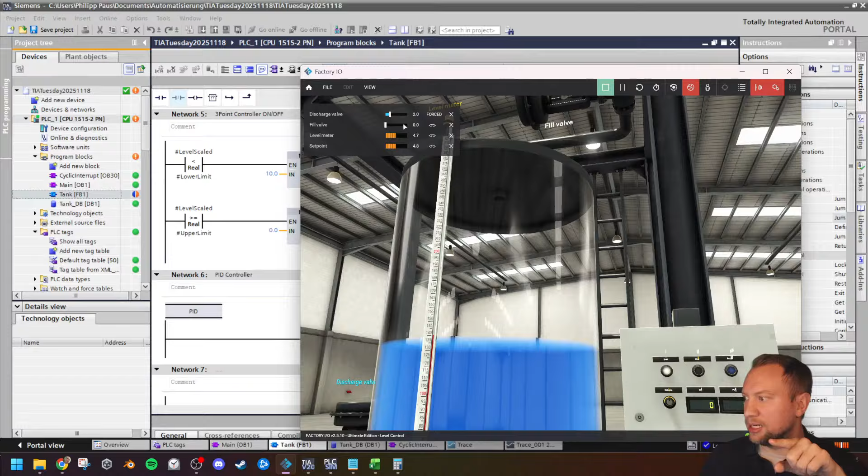So the thing is, the PWM would be more on the output side here. Right now, our fill valve is not PWM controlled. It kind of is over a longer term, yes, but right now it always turns on and off fully. Always 100%. It doesn't know, oh, I turn on a little bit. No, right now it's completely off. And in a second it will turn completely on. Right now. Turns on completely. It doesn't know anything in between.

So what we could do instead is, of course, control the fill valve and make it much softer. That's what the 3-point controller could already be doing. It could already be softer and I could say, maybe 10. 10 is too aggressive, right? And 0 is also too aggressive. I could say, maybe keep it open a little bit, maybe 1.0, and don't open it so aggressively. Open it maybe 5 points, maybe only half, right? I could do this, but I would do this manually right now in my program here. This would already be much softer now.

And the output is what I want to PWM control, like the value. I have this analog output. There are two different types of PWM. One is time control, that's the one that we have now, and the other one is value control. And I could value control this. You see, right now, because I'm still letting out 1.0, the fill level of the tank doesn't go down as aggressively anymore. Because I'm using 5.0, it doesn't aggressively go up anymore.

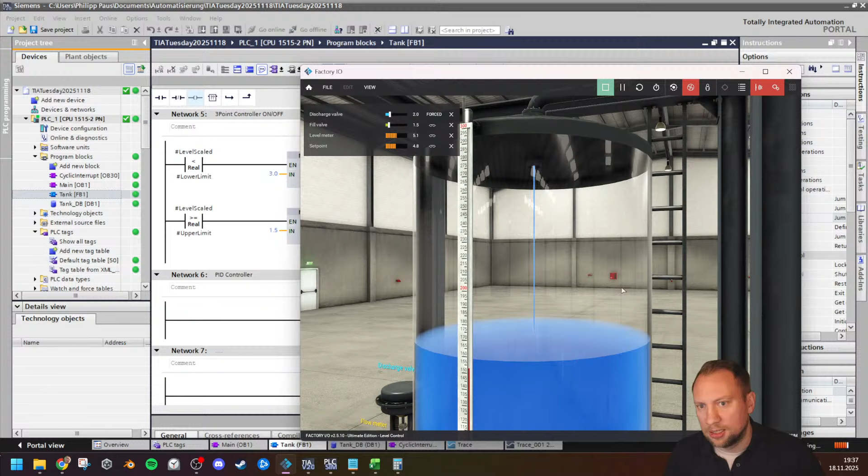It's much softer. So what I would do over a longer time, of course, is find better values. 1.0 is too soft. Maybe make it 1.5. And maybe make the aggressive one 3.0. Right? So I would try to find good values that are still fast, but not too aggressive. Right?

Random question. Codesys is good? Codesys is good, yeah. I haven't really worked too much with it, but I know it's big and a lot of people use it. That's why I would say it's good. If a lot of people use it, it must be good. Doesn't have to be, but usually is.

So right now this is not as aggressive anymore. So our system is much more stable, much nicer. Right? Now I could permanently monitor this, and I could manually, not with the PLC right now, I could do this with the PLC, but I can manually take my fill valve up here and try to find a good value for this. Right? Maybe 2.5 is great to keep a constant level. Like I could manually change this up, right?

Yeah, it's a bit like pulse amplitude modulation. Yes. Right? I could manually do this. This is what you do in your car, right? You don't go 100% acceleration, 0% acceleration. That's not what you do, right?

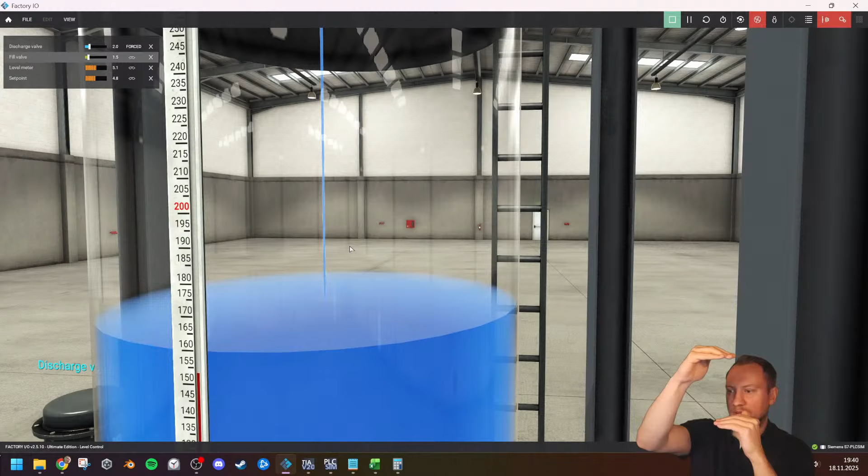If the error is 100% of the maximum, you will go full gas. Right? If you are at the point, you will go 0 gas. You will not accelerate at all anymore. So the stronger you have to accelerate, the stronger you want to accelerate.

And I don't drive like you probably. I'm not a scared driver, but I'm cautious. I would say I'm a very cautious driver.

So what we need for this, guys, is the first part here. The first part would be the calculation of how far we are away from the set point right now. How far away are we? Brings me back to control systems. That's exactly control systems, yes, 100%. How far away from our set point are we?

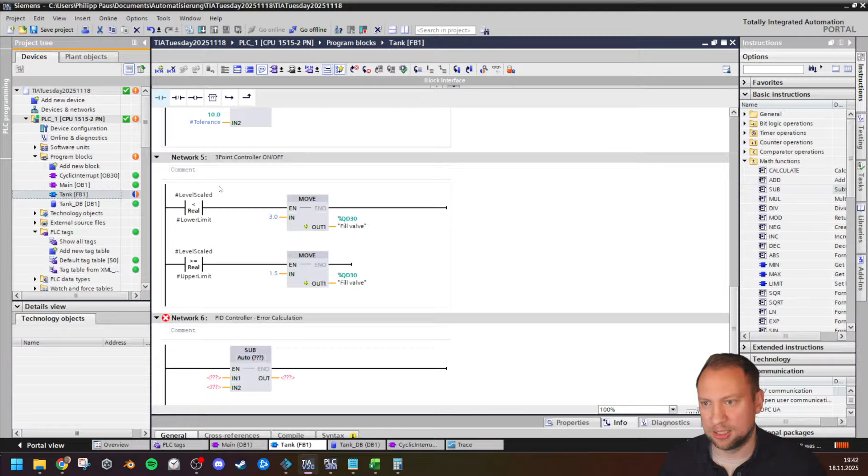So it's a simple, what's it called? Subtraction. Yeah, subtraction. Oh God, my English. It's a simple subtraction. So this is the first thing that a PID controller does. So I will now have a PID controller here. This will be PID. Jump label doesn't exist. I know. There we go.

Depending on your system, usually you have an optic or an ultrasonic sensor. But you can also use a pressure sensor. Depends on the level design.

So what we calculate here usually is the error, right? It's not really an error. It's just the value of how far away from the set point we are right now. And this is, of course, a real value. We will calculate the error from our current set point minus our current level. So the closer we are to the level itself, the smaller the error.

So right now we are almost at the set point, and you see the error is rather small, but right now the error is getting bigger and bigger because we are moving away from the set point. You see this is dropping very, very slowly, but we are moving away.

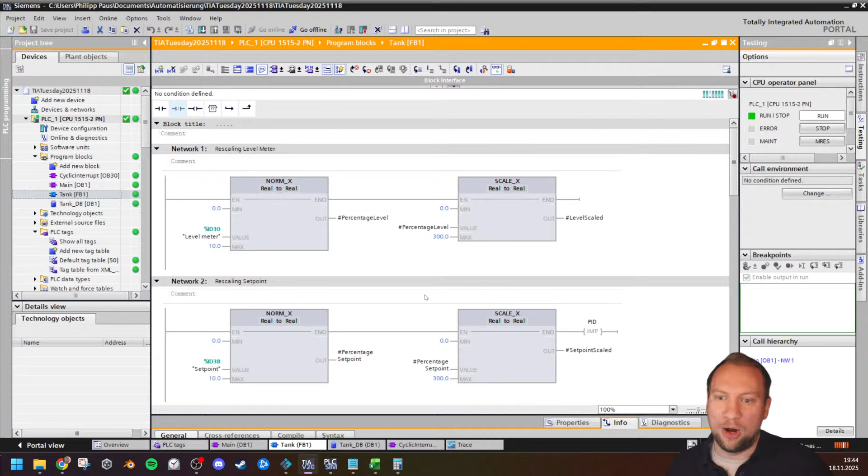But now is the interesting part. I can take this and put it to my output. The problem with the output right now is that the output, where is my output? Yeah, the output goes from 0 to 10. If I would now put out the error directly here, that would of course be a big problem.

This error right now, putting it out, that would basically just be an on-off again. So what we have is we need to rescale everything. Now it's full math. I'm not going to do a full math class now. I planned on doing a little bit, but not really. Right? We do have the error, and the error itself has many parts associated to it.

One very important part. Thank you very much. One very important part is the maximum error. What would be considered 100% error? And the maximum error in our case, and I will do some calculations here, the maximum error. The maximum error, and that is a REAL again. Now the maximum is of course our, not the level.

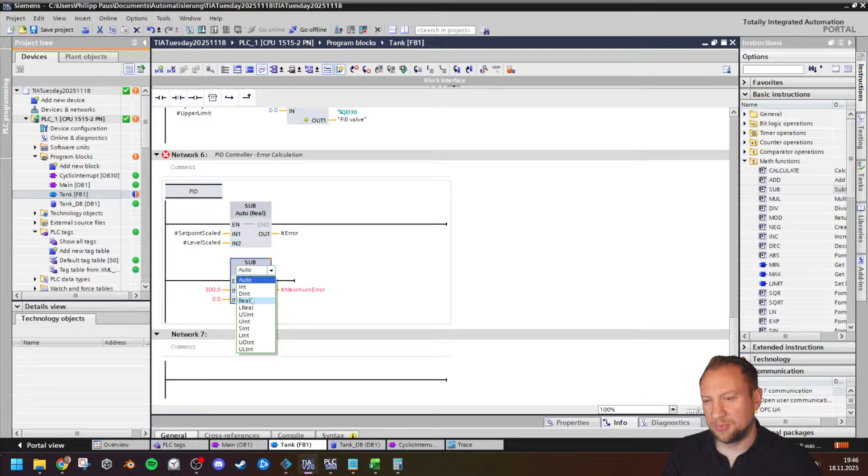The maximum error is of course from 0 to 300. So the maximum error would be 300.0 minus 0, which is kind of stupid right now, but there we go. That's our REAL. So the maximum error. Important. This is just important stuff. I think that's what we have to do now. That's our maximum error.

You can always ask questions. Hey, Coit. You only make it for last. Jason, it's gonna be like 15 more minutes today. I still want to finish like a little bit of this.

Okay, now, right? We do have this. Now, why do I need the maximum error? What happens is in a proportion, and we would go with a pure P controller first. In a pure P controller, you want to go, of course, the strongest if you have the maximum error. You want to go the weakest if you have zero error. So the difference between those two is now important. It's all math. This is like the saturation limits. Yes.

Now, another important thing in this is that you have something called the proportional, like the value, a multiplication value. Now, this multiplication value I will put in as a constant. This is gonna be too much. Like this is, if you phase out, perfectly fine.

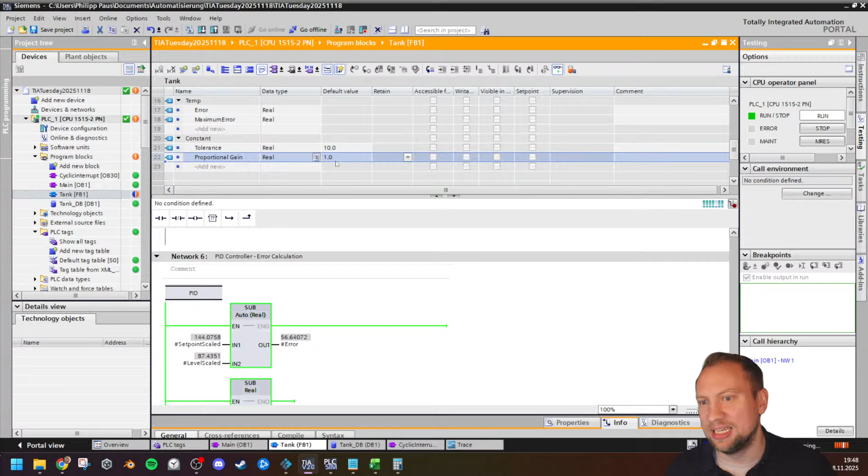Now, the proportional gain is an important factor. I will not go into the most details here. But if we set the proportional gain to 1, this is a multiplier. If the error right now is 300, which is our maximum error, our output will be on at a maximum, so at the 10, right? If I have this at 5.0, the output will already be on to 100% if we have 1/5 of the maximum error, so 60. Right?

So this is an important factor. It's a multiplier. Yeah, but it's usually called gain. Right. So right now, if I have an error of 60, which I currently have, and a gain of 5, our output will be active at 100%. And it is, of course, limited at 100%. So what I will have to do, and thank you everyone for the answer there, sometimes I also like words. Now what I have to do is, of course, do more calculation here. That is what I will put in the next network. The proportional part, I will call it.

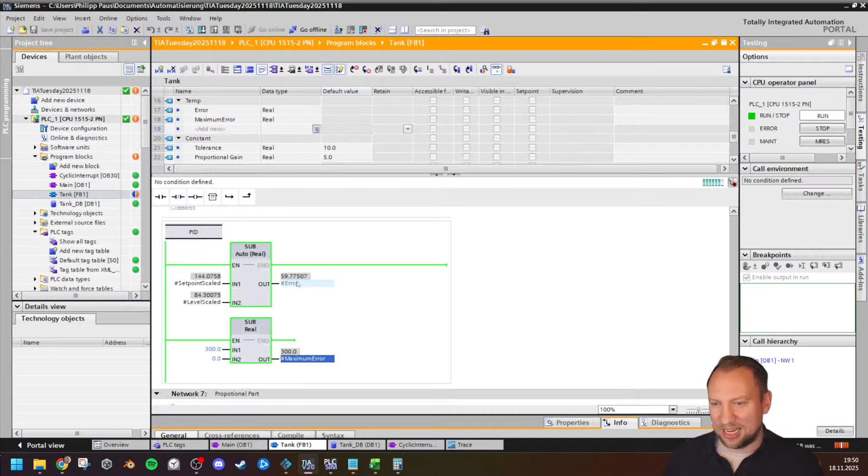Now, for the proportional part, oh my goodness, I have 10 minutes. I can never ever finish all of this. Now, for the proportional part, as I said, we will need some mathematics. We will need to see. We will need to multiply, of course, the current error. The current error will be multiplied with the proportional gain. And I probably will make a mistake, and I'm sorry if I do, but now I'm really rushing it. So the current error will be multiplied with our proportional gain.

And this is now for our controller, this is the proportional part. How strong is it going to react on the error right now with this proportional part? I will call it proportional reaction, which is not 100% correct, but I will call it that. This is now also in REAL, right? And this is the proportional reaction.

Now this proportional reaction right now is 5 times the current error. What we will need to do is it will still need to be limited in between 0 and 300. Right? Yeah, we will, exactly, we will.

And is it Emil or is it Emily? It's Emil probably, right? Yeah, we will still need to scale it for the output size, 100%.

But what I need to do first is, right now I do have a little bit of a problem because this proportional gain will now make it to a higher error, right? We cannot go above 300 because 300 would be our maximum, right? So we want to have the maximum reaction if we have the maximum error. There we go. So what I need to do is I will need to limit this value now. This can only be between 0 and 300.

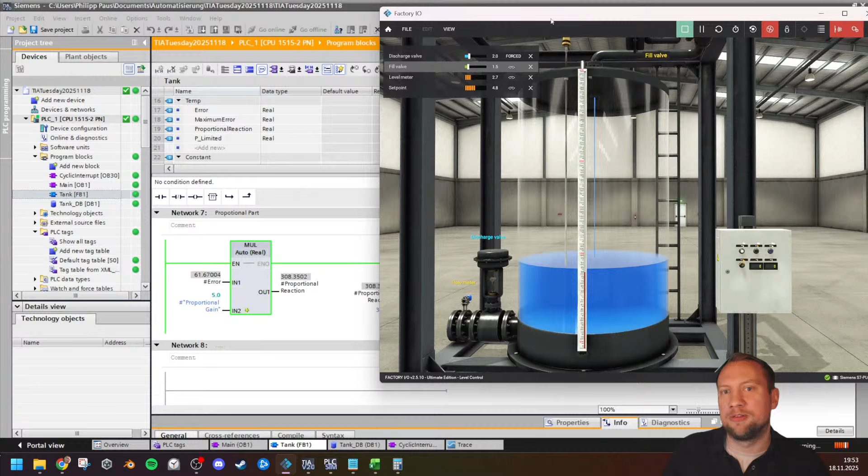So right now you see, if we have an error above 60, the system reaction should now be at a maximum, which it is. Right? 300 means we have a maximum system reaction. Now, if the error is smaller again, which I will now make, right? The system reaction will also go smaller.

Okay, perfect, Emil, then. Thank you for your assistance here. You are now my official TA here, my teaching assistant.

So you see, right? Right now, this value here is important for us. What we need to do with this is if this is 0, our system should not react at all. And if this is 300, our system should react maximum aggressively. All right? If I did the math correct. Yeah, I probably did the math correct.

And let me, before I read the comments again, sorry, let me do this because I don't want to make a mistake, because what we need to do now is we need to scale this on the output, of course. Right? And therefore we need a norm and scale again. Ugh, so annoying. Norm. So I will need to normalize this from 0.0 to... So this can go from 0.0 to 300. And the value is the P limited that goes in, and the output is then in percentage, and the output right now should go on.

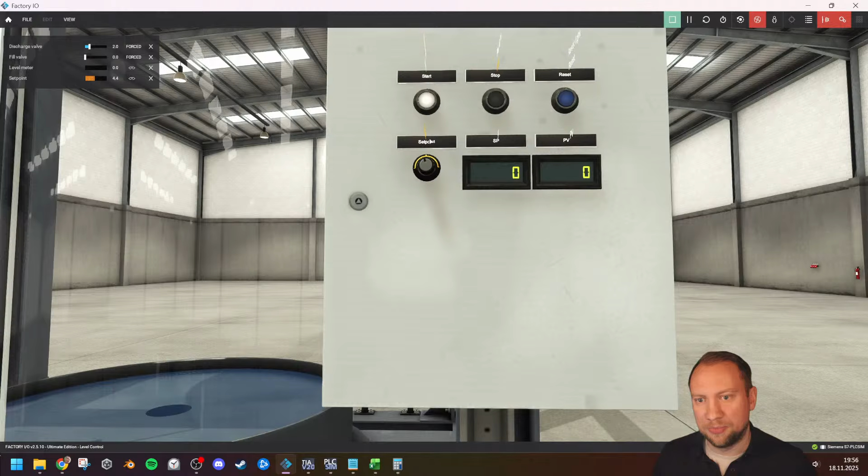Valve, what's the valve? How's the output fill valve? There we go. Now this is a P controller right now. Hopefully. It probably isn't. We'll see. So right now, the closer we get... Why isn't this... Oh, I'm forcing it. The closer we get to our set point. So I'm going to put the set point now to 150-ish. Right, to half the tank.

The closer we get to the set point, the less our valve should be open. I'm still forcing it, so I'm short-circuiting it. So now I will release it. And now we should get a nicer reaction.

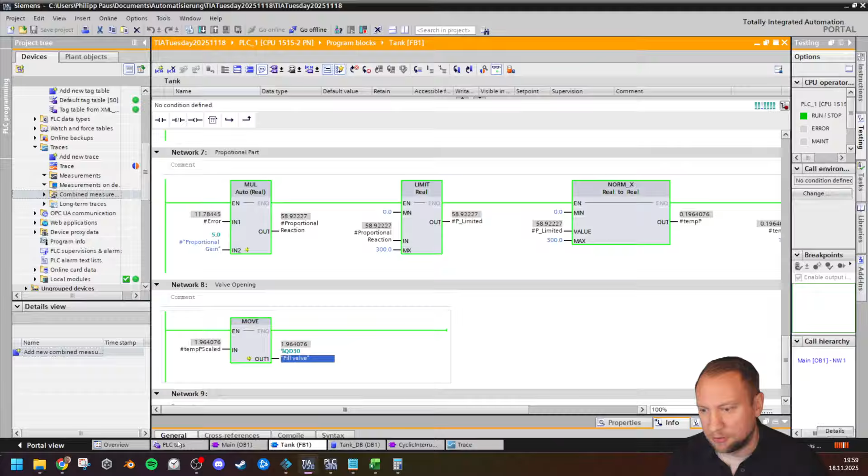And I also want to monitor the strength of the P controller here. No, I can take the fill valve, because that is our strength. We only have a pure P controller, so I can take the pure output here, which is the fill valve. There we go. Not perfect, but that's what we have right now. So I am going to record this for 120 seconds. Maybe 2 minutes is enough. And I want to record when I have the set point there. That should be fine. And now I want to download this.

As soon as I click recording, I will reset this thing first. Why is nothing happening? Oh, because of that. Okay. Hey, Engineer Kirsch. So as soon as I put the set point on a higher value, the trace should start tracing. Let me download again and activate the trace. It's not tracing right now. The maximum error is for my math calculation; it's internally needed right now. So if I set the set point, now it is recording. We have to wait for 2 minutes to look at the recording.

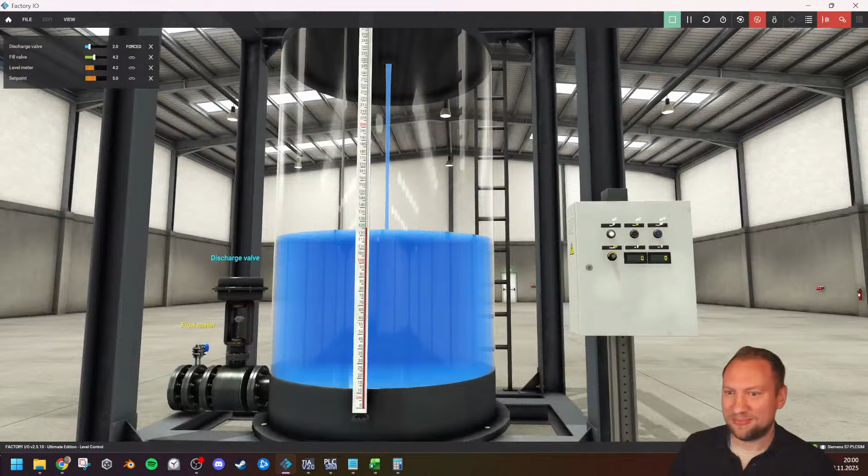Yes. There we go. So this goes up. I should make a PID video about this. This would be great for explaining PID. And you see, this is getting smaller and smaller, more slim, because the closer we get to our set point, the less the P factor is going to react. This is now the steady state error. And the tracing is happening. This looks great. This is just how the controller should look. This is so good.

I should be teaching automation classes. I should be teaching process control classes, because that is what process control is, right? I'm gonna make a video out of this.

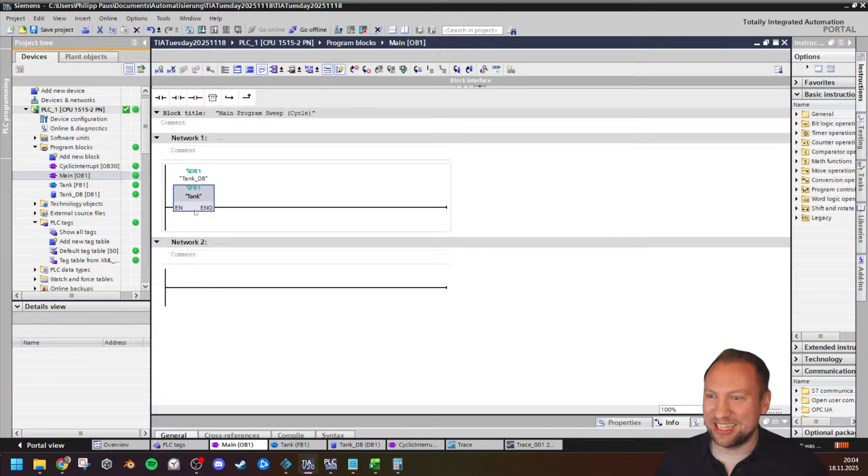Now, the second thing that we could do, oh, this is going to be fun. The second thing that we can do is I do have one value that I can play around with and change. And it's this one here, right? What will happen if I turn this, for example, to, I don't know, 50.0? That would mean my proportional part would act stronger. So we would make this smaller here.

Now the jump from 5 to 50 is very aggressive. That is way too much. Just wanted to emphasize on it. Let's take a value that makes a bit more sense. So let's make this maybe 20.0. If this is now 20.0, you can take guesses, and some of you definitely know, what is going to happen? And with 20, I don't know. Maybe it's not aggressive enough yet. So I'm going to reset this thing.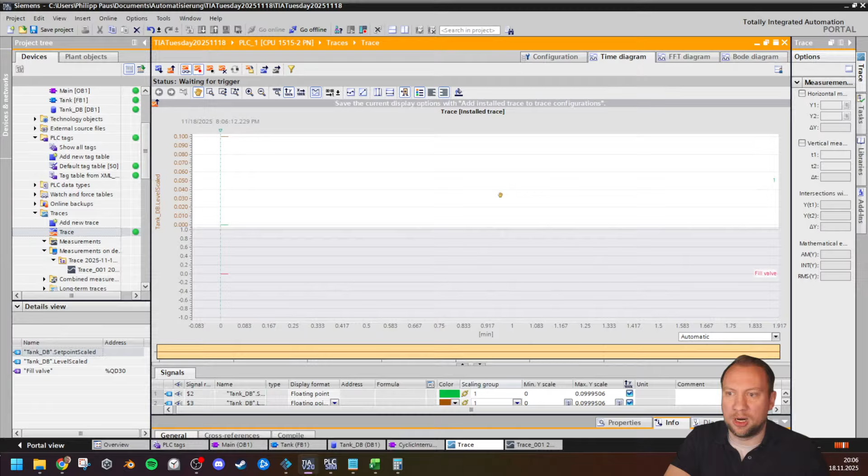So I will start recording and I will now wait for the trigger. So we have to wait for 2 minutes here again. I should have taken a screenshot. Damn it. Doesn't matter. Now I will put the set point higher here and this should start the recording again. There we go. And now this is going to record for 2 minutes, and then we will look at the recording.

But now I can read the chat finally. Adaptive gain, not right now. This is not adaptive gain. Not gonna happen. All right, to the physics behind them. Oof. Where I had PID in school was actually in the physics class. I can give advanced topics in TIA, yes, but not right now. Yeah, I do. Like if I drive a car, P gain is also for me like 10,000 maybe.

The measurements are stored on the device, yeah. Oh, I could copy them into the project. You're right.

Let's see. So right now, ooh, this is actually quite nice. 20 is not enough. But look at what happened here. At this moment, you see this? This moment is very interesting, relatively speaking. We had a little bit, and it's not in the measurement here, we cannot see it, unfortunately, but we had a little bit of a strange system reaction here. So, and this is a nice controller right now, what I will do to emphasize on this is I am going to increase this, and let's make it 50. Because I want to emphasize on...

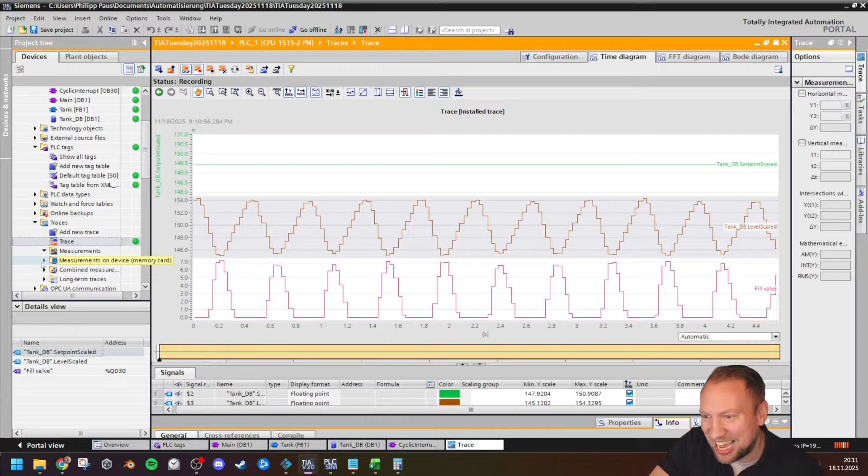This is actually a fantastic example. I do absolutely love this example. You see this? This is right now my controller. I mean, it is resonance. It is a little bit of resonance going on there. Let's have the scaling in there. It kind of looks okay here, right? But what we start having is we do start having oscillations. How do I zoom in on just the Y axis? I can't. So it doesn't matter. So we have a little bit of an overshoot here in the beginning.

How do I get there? A plus. There's a plus icon. I'm an old man. I have to press the plus button now. So here, right, the brown one. So we go a little bit above, and then our controller tries to react on this very, very aggressively. If we're above, it turns off, of course. As soon as we get below, because the proportional part reacts very strongly, we will react very strongly. Not at 100%, it's not a full on-off controller yet, but it almost is.

So if the P part would be infinitely strong, we have an on-off controller again. Yeah, this is an on-off controller. Now what we could do, Emil, yes, 100%. We could take this right now and tune it. This is now what we need to do for tuning, and I will wrap up the stream with this probably. Right now we do have those oscillations, and they're way too strong. Probably they started at like 30 or so.

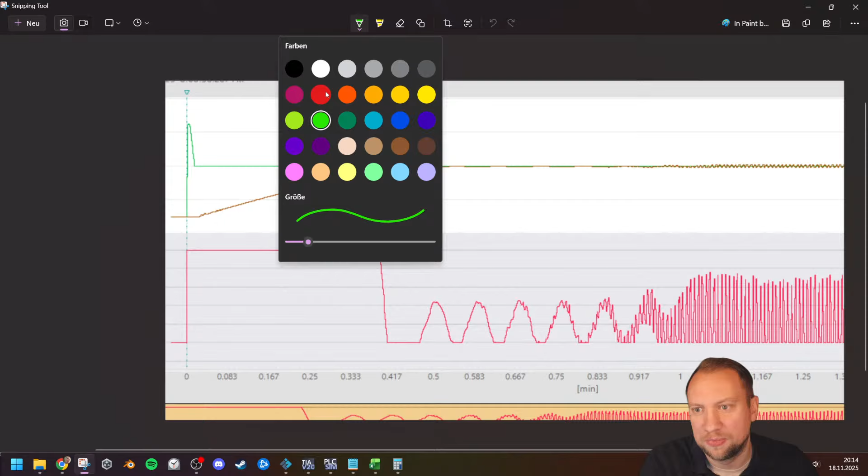Right? At some point, this behavior that we have will start, which in my assumption is around 20 in our case. Now, what I would do with this is I would tune my controller, and there are standard methods. Oh, this is fun. Like tuning the controller right now to find the perfect P, right? I would look at the difference between our oscillations here.

What's the time difference? And I can see the time difference is 0.083. I mean, this is almost perfect here. Almost 0. Maybe 0.1. Let's say 0.1 seconds. Oh no, 0.1 minutes. Can anyone calculate how many seconds this is? I can't. Wait. 0.1 minutes in seconds, 6 seconds. This is embarrassing. Yeah, this is approximately 6 seconds. Right. So approximately 6 seconds from this part.

The smaller oscillations here, by the way, those are errors in the sensor. So the smaller oscillations don't really matter right now in our case, because this is completely the simulation, and because I exaggerated with the values. So we would have 6 seconds. Now with those 6 seconds, we could put this into a tuning table, right? Oh, by chance, I do have a tuning table.

We would now, let's assume this would start happening at a P of 25, or a proportional gain of 25. Let's assume this would happen at this. I could test this now, I will not. What I would do then is I would take this and take one of the tuning methods. Let's take the ZN tuning, the Ziegler-Nichols method.

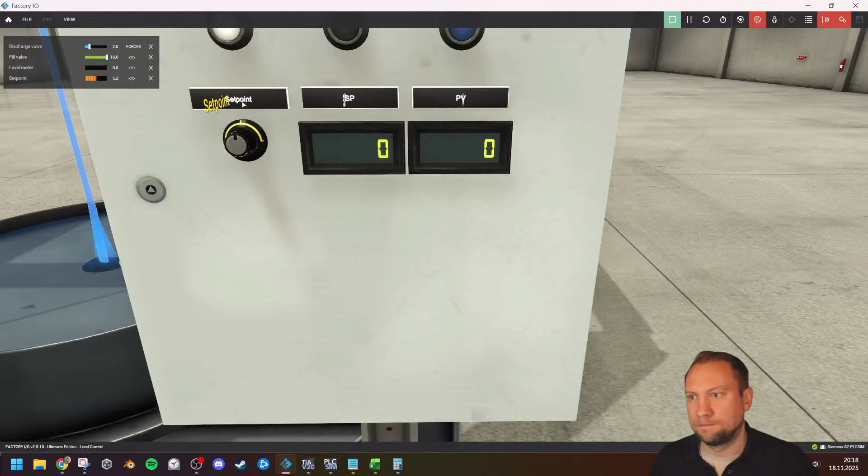I know, I know that I could just use AI. I was thinking about it for a second. I could just send the trace to ChatGPT and let it tune it. Yeah, could do that, but no. No, we will not do so.

So my assumption is we will have oscillations now. Yeah, we have a little bit of an overshoot. Ah, no, we will not. Let's say 45, 40. And this is what you literally would do in controls engineering, right? You would slowly raise this to a higher level. So now 30, and I would check at 30, do oscillations occur? No, not yet. At 35? No, not yet. At 40, do oscillations occur?

Yes, they do. Maybe at 50? At 50, we tested it. At 50, they do. But 50 is already too high. You know how I know? Because this reaches 0 again. As soon as this reaches 0 again, you know that the value is too high. Just a little bit here, but it reaches 0 again.

So right now 40. My assumption would be maybe 40 could be ish. Now what would be done in controls engineering generally is I would look at the Ziegler-Nichols method. I see, 40 is too high. What should it be now? 40 is when the oscillations start. Oh, I should just have my proportional factor at half of it. So a good proportional gain right now would be 20. With 20.0, we will not get to our set point, but we will almost get there. We will have a decent system.

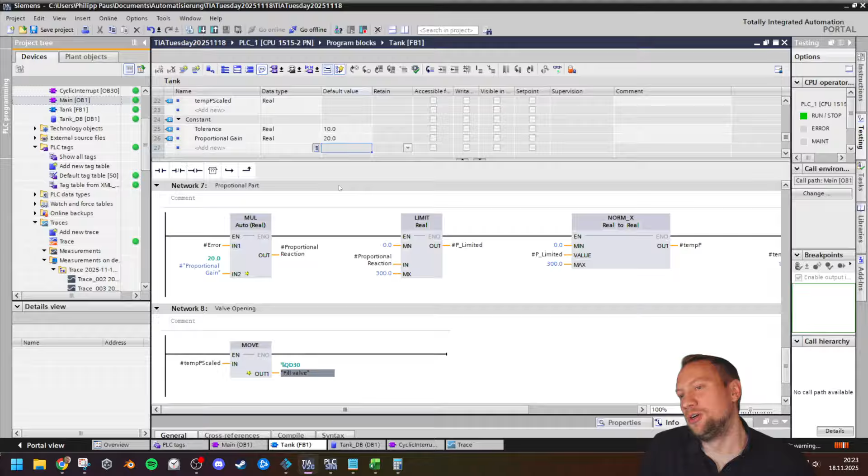Control systems are measured in speed and stability. So you try to get a stable system and a fast system. And those values have been proven to be stable and fast enough. No, with our tech nowadays, we cannot do 100%. Maybe never ever. Who knows? And it's fine. This is close enough.

On Bode plots, yeah, of course, you're right. We could also use Bode plots. Ooh, no, Bode plots are not allowed. Right now we are controls automation, not even engineers. We are automation technicians right now. We don't care about details.

In this case, even the simulation, even the communication speed between the system and this here, there are many factors. And you see, it kind of stabilized. It's not 100% stable, but it is very close. But we have this steady state error here still, unfortunately. Now, what would we do to counteract this steady state error? How could we still fix this little bit right there?

And this is, of course, where we would improve our system, because a pure P controller will never be perfect. It will get close to it. This is pretty good, except for in the end there. I think with a P factor of 20, it's pretty good. But a pure P will never be perfect. Let's say this was at 40 and then maybe, yeah, that's fine. Pure P will never be perfect.

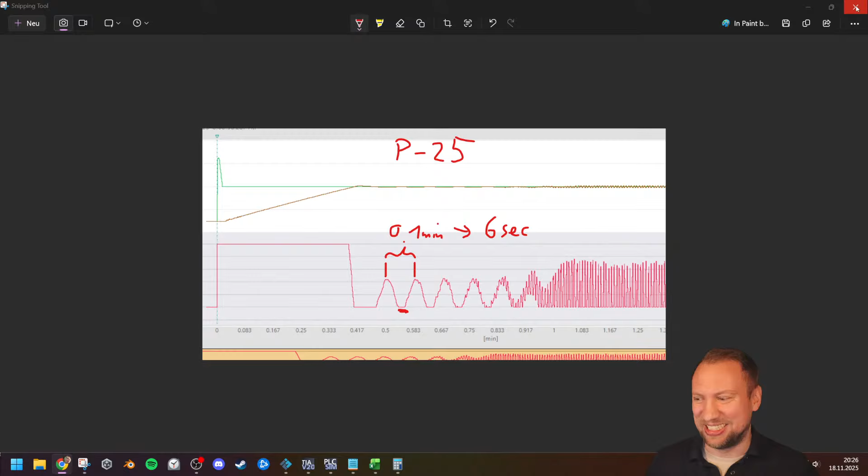And now the last thing that I want to do, and now I'm already over. So I will probably take this to the next time, like next Tuesday, maybe I'll add on this. Maybe I'll make a video out of this, though. Could be both. But now what we would do is improve our controller and make it not just a P controller, but a PI controller. Right? And the integrational part would help us with this steady error. That's what we want to counteract.

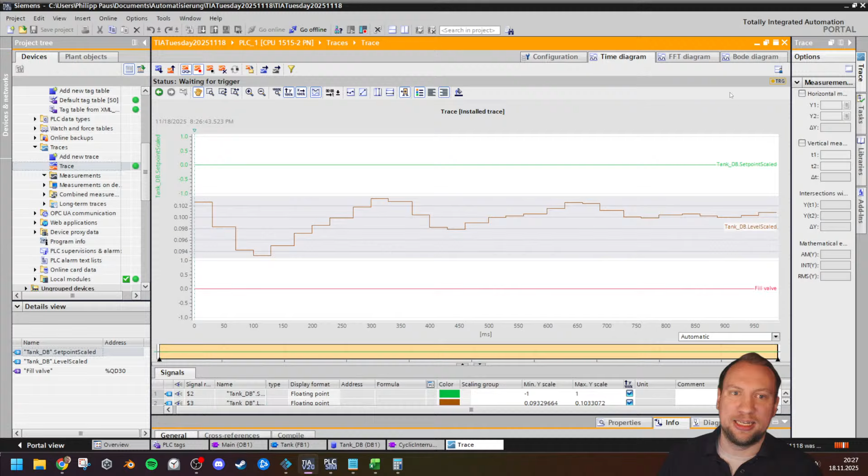So I could very quickly add this, but no. Not gonna happen. I'm already over the time here. What I will do though is I will stop recording now. I'm going to reset my tank, right? I will now leave this view. I'm going to now download my trace. I'm going to now activate the trace. Why is something happening? There shouldn't be anything happening. Oh, the fill level. The level is still doing things.

Okay. And now I'm going to do simple calculus. I mean, depends. I would say in school it would already be called advanced calculus. I don't know. In Germany we don't have simple and advanced calculus. We just have arithmetic. You got 2 hours over your stream like in the past. Oh no, I usually don't. Yeah.

So let's look at this, right? Yes, this is right now good. This is exactly what we want to see. This P controller, a pure P controller, has been tuned nicely now. It reacts very fast, 100% speed here in the beginning. Then it will let go very fast as well. It will not overshoot. Overshooting would be 0 here, right? If we go below 0, that would be an overshoot.

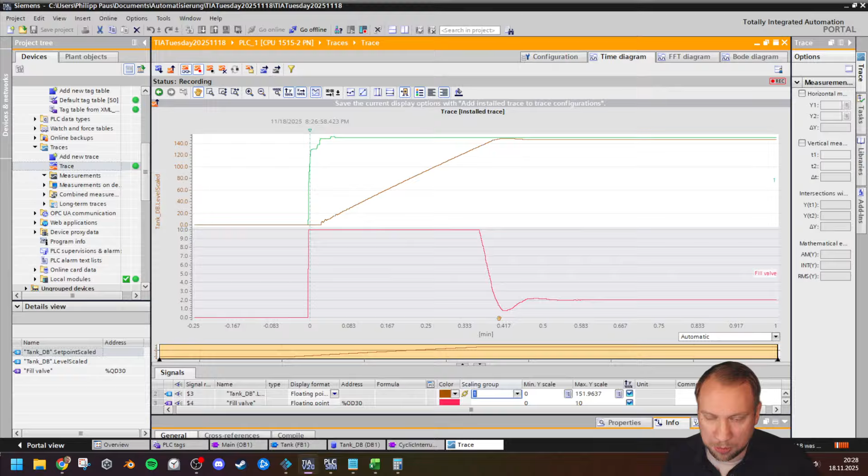It will not overshoot, and it will have a small steady state error, but that is only a small one, right? That is a pure P system, well tuned. And look at this, we just made it ourselves. We have written it.

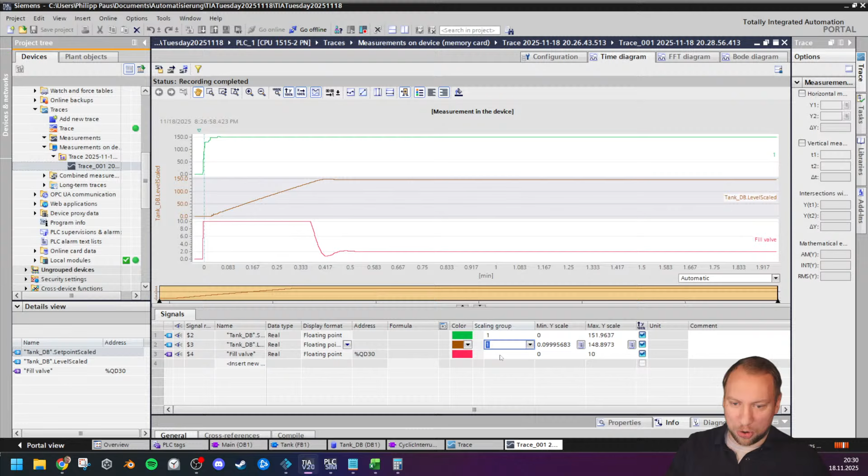Yeah, this was way less than I hoped for what I would be doing today. So I hoped for finishing the PID controller, because right now we could also add the integrational part. The integrational part would be mathematically easy to implement. A little bit of calculus would be there. But we can, of course, use a pre-made block. There is a pre-made block that does math for us.

And this pre-made block is basically why the video is also called PID. There is a technology block here called PID Compact. This PID Compact block does what we did and way more. So we only did the P part right now. This one does this and way more automatically. You need to have a lot of settings, but it helps you with setting this up.

Just the integration, Oliver. No, we will not do integration. The problem that I have with the integrational part is we have to enter the second dimension. Right now, all of our system.

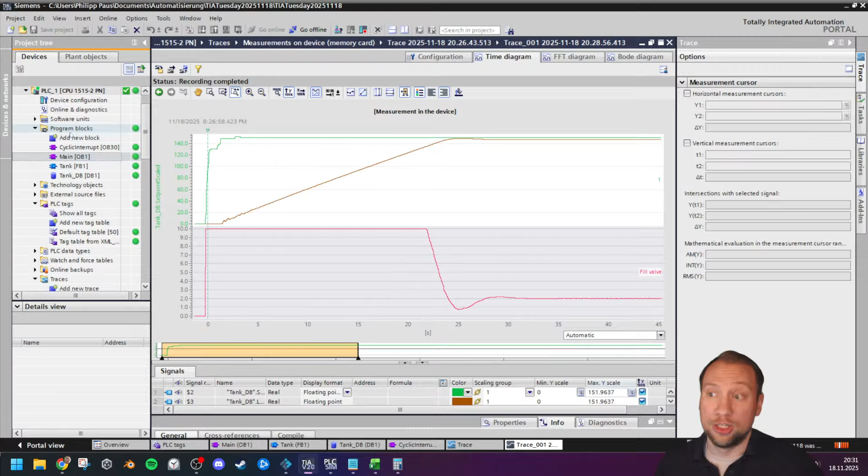Maybe you've seen on the left side in your tree there, you have so-called technology objects. And we could add a new object, and this object would be a PID compact. And a PID compact object lets us do so much more cool stuff here. I could probably easily implement this now, but I will not. Look at this. Process value limits and process value scaling. This is what we've done mathematically. We did this.

Now, one thing I still want to test, because one of you had a comment earlier on, and I kind of want to have the PID Compact thing here now. One comment worried me a little bit earlier on, because one of you said, hey, you cannot simulate the PID Compact. And I was like, no, you should be able to. If I can download it, it should be able to simulate it. Yeah, I can simulate it. Technology objects, yay. I would love to finish this now.

And you see, we do have the set point. The input would be our tank. And the output, PER, I think, would be our output now that we need. And then we have everything that we did. Now we could, and much more. So I will leave this probably next time.

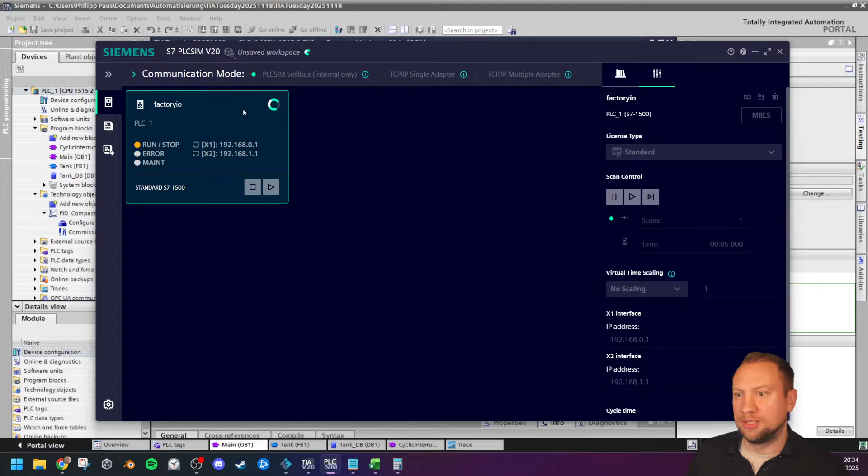The only worry that I have is that I will be running out of license of PLCSIM Advanced next week, so I will still be testing one more thing. PLCSIM, not Advanced, standard. That's the one thing that I will test now. So this is now simulating here. I think this might be a problem, that we can only simulate it with PLCSIM Advanced. That might be the problem for the 1200, because 1200s don't have PLCSIM Advanced. Let me see if this... no, this works. Seems to be working.